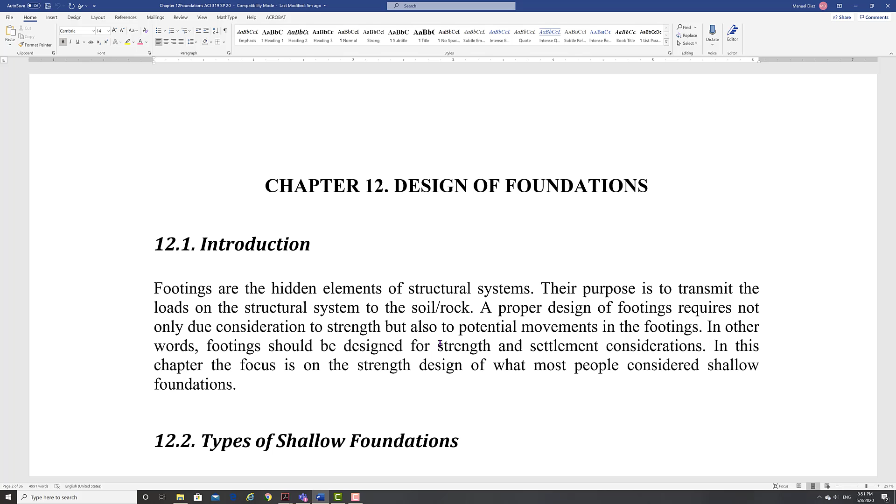In Port Aransas, they did one building, an apartment building, and that was a big lawsuit. The building started sinking, and they had to demolish the whole building just because of settlement. So, very important.

So we're going to look at shallow foundations, because there is also deep foundations, which are your drill shafts and piles and all that, but we're not going to do that. This one is going to be shallow foundations, and actually it's going to be even simplified than what I said here.

And this is really a design. In your foundations class, it's more of a geotechnical class. So what you learn there is the soil's properties, not so much the design of the foundation.

So the one we're going to concentrate on is the isolated spread footing. This one either looks like a square or a rectangular picture, and it's very typical of lots of foundations that don't need something very deep. That's the one we're going to concentrate on.

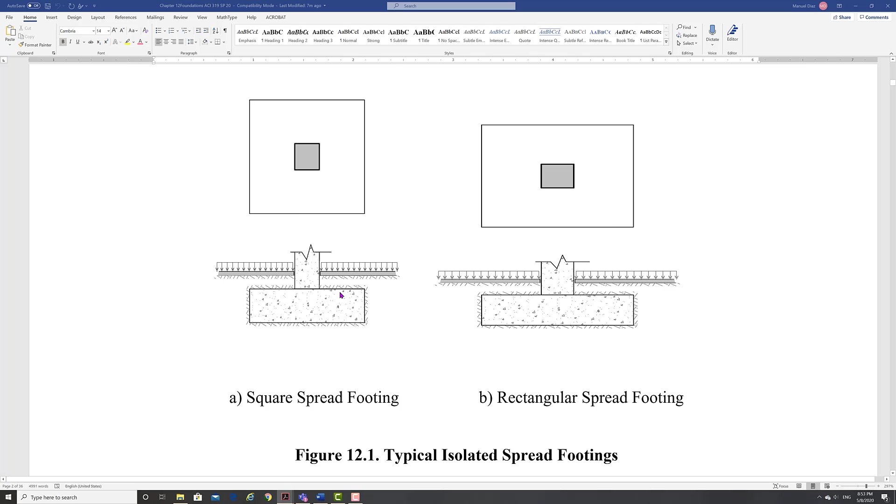So for your project, you should be doing one like this, a square footing, and hopefully you have picked a square column. I don't see any reason for you to pick a rectangular column. So let's do a square column, a square footing. That's the simplest. Then you have the strip or wall footing, which also is pretty simple.

So we might do an example of this. There is the combined footing, when you combine because the areas overlap, and so now you make it one big footing. And you have different kinds.

Sometimes what happens is you are at the property line, especially in downtown areas, things that are very crowded. So your column has to be at the edge of the property line, but that creates eccentricity. So you join it with another column to kind of balance that.

There are different types of combined footings. You can make rectangles, you can make trapezoidals. It depends - that's more about money, right? Because this one you have to form it and all that, so it costs more money.

The strap footing is similar to the combined footing. The difference is that you join the two footings with a beam. So this is actually a beam, and this means that it's going to bend - it's not going to touch the soil. But joining the two is going to avoid the eccentricity due to a column near a property line.

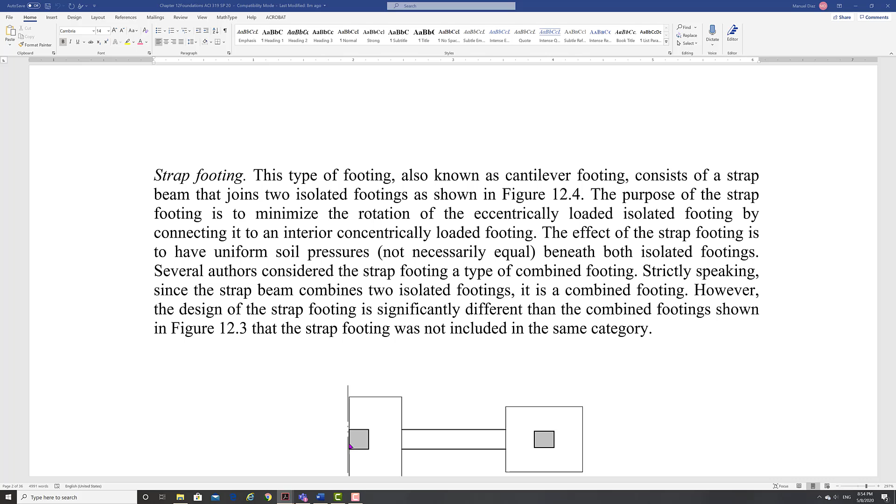The mat and raft foundation is a bigger one. This is covering lots of columns, and usually when your footings are taking about 50% of the floor plan, then definitely you want to do that. Some people go even at 33%, and you start putting these mat footings.

And there are buildings that use this. Actually our lab, for the structural lab, the new lab, that's a big mat foundation. We use it for storage tanks, heavy machinery, chimneys. Typically it's a solid slab, but it can have a combination of beams and slabs. The one in our lab is a combination - it has both, because it has a floor, some beams, some walls like beams, and then the actual footing.

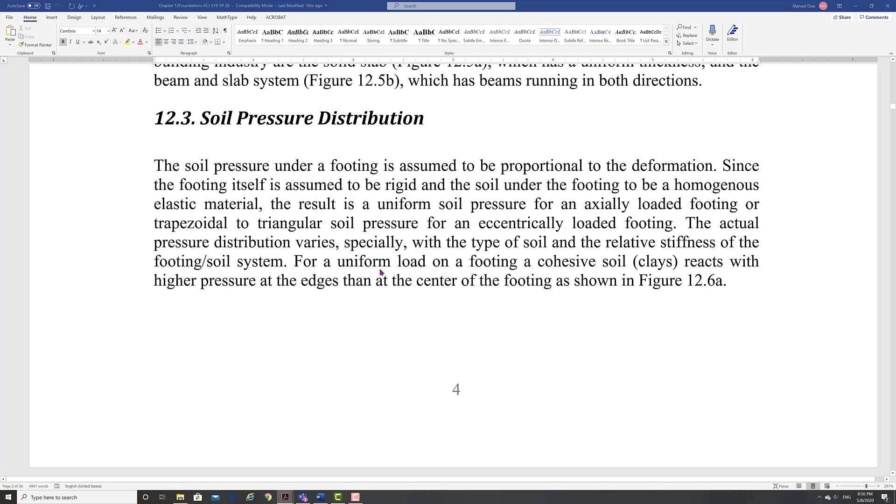All right, so how are we going to look at the soil pressure distribution? That's what we're looking at, right? And the soil is not uniform, so it creates different issues. So that's one of the problems.

Okay, we could design for this, right? But you're already thinking, no, that's too complex, right? Yes, you can do it. You can do your integration, all this calculus if you want, and find your forces and all of that. No, we don't do that.

We are going to make this an equivalent average rectangular pressure, and that's how we're going to design. How do you find the value of that average rectangular pressure? That's what you're going to learn in your foundations class after your geotech. Usually you get it from a geotechnical report. The people that specialize on that will give you those numbers.

Now, the bearing capacity of soils still gives us an allowable pressure. So now we're going back to the concept of the factor of safety.

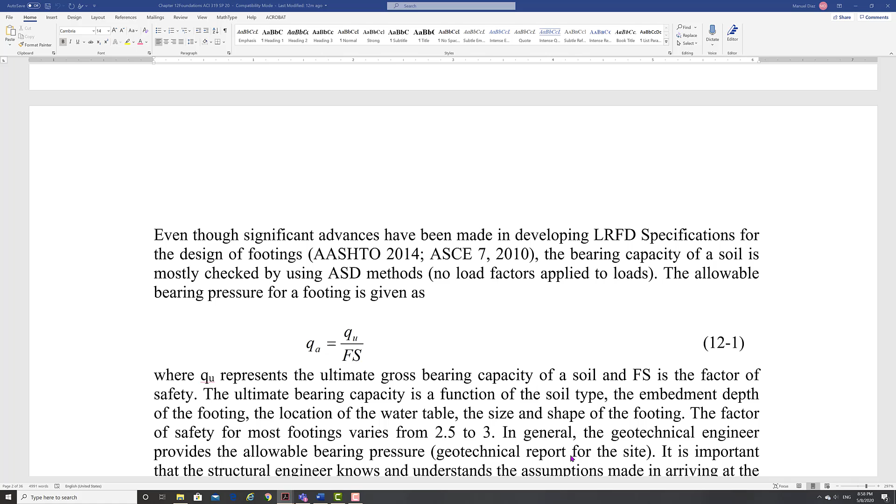The geotechnical engineer will give you the report with the site and the recommended pressures. Now if you are doing a preliminary study, you don't have any values here. Depending on the type of soils, you can pick some values for your pressures. Okay, so this is just a guess, an average of the whole thing. Don't think, oh, I got it and it has to be this. No, this is just to start.

You should have at least one test done on your site to determine the pressure on your soils. At least one test. And that will depend on the size of your structure, of course. But you need to test your soils to determine the actual pressures you can put on that soil.

So the geotechnical reports and even the codes are specified as gross areas or net areas. We need to differentiate between gross and net. A gross pressure will include all the loads that are going to be transferred to the footing, which means the weight of the soil that may be on top of your footing, the weight of the actual footing, and the applied structural loads, and any surcharge on top of that needs to be included.

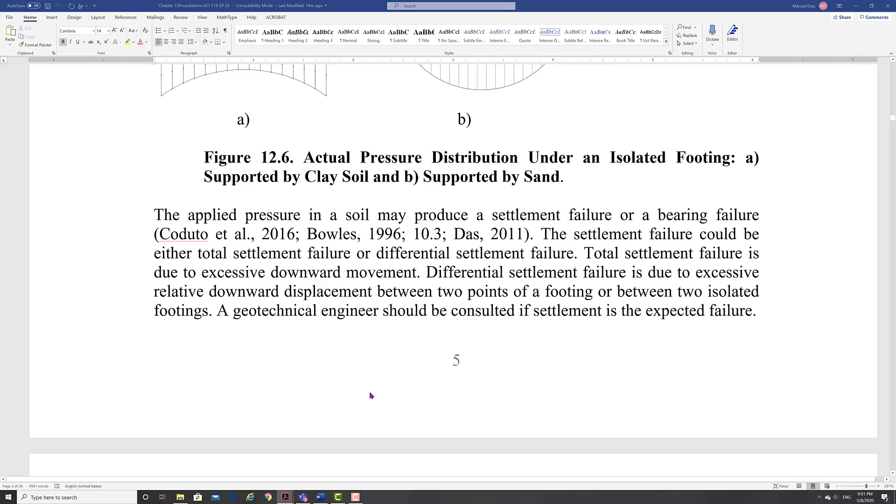So your unfactored gross total loads divided by the area of the footing has to always be less than or equal to your gross allowable value. What that means is you have your service loads coming from the column divided by the area of the footing. Now this is a problem, because we are designing our building with factored loads. Our reactions are factored loads, but for the footing, I need service loads.

So right there, we had to change our reactions into service values. We had the weight of the footing, the weight of the soil, and any other surcharges that may be applied to this structure. A surcharge, for example, would be if you had a footing here, more soil here, and on top you may have a parking area where big trucks park. That pressure from the big trucks has to come here. So that's a surcharge, a special load applied there.

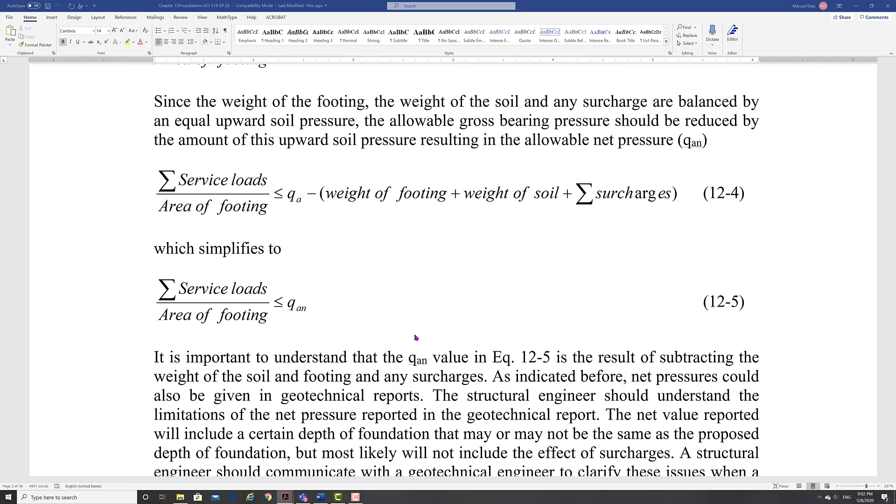The other way to do it is that you only look at your loads coming from your structural columns. But that means to this gross value, you need to subtract the weight of the footing, the weight of the soil, and any surcharges. All this becomes your net pressure. This is important because sometimes in the geotechnical report, they will give you a net value, but what values did they use to find that net value? So you may want to call and ask to make sure you understand what value you are getting.

So your Qu net is simply your factored structural loads, divided by the area of the footing. This is the value we use to design the footing. So what is this allowable qa then? The allowable is used to find the area of the footing, because you need to have some area so your pressure will be okay. So the allowable values are only used to find this area.

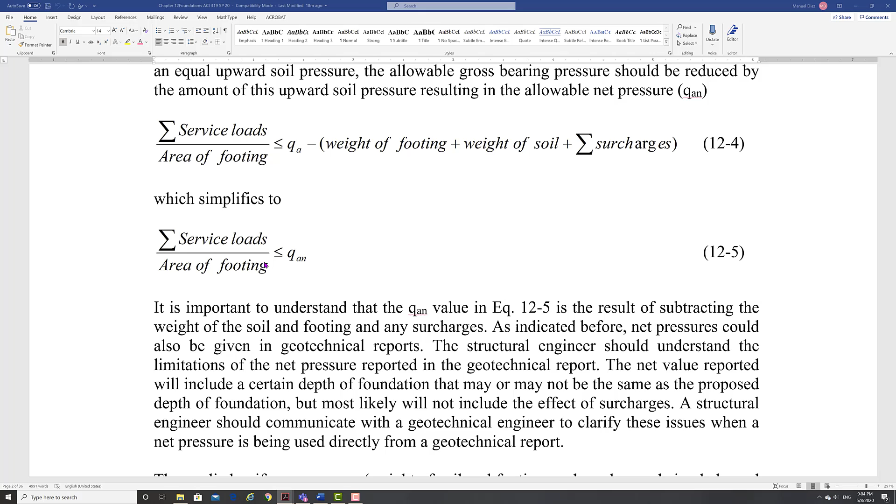Once you got this area, you had to design the footing. But the footing is a concrete footing, and concrete is designed using factored loads. So now we had to factor the loads back again, with the area that we found, and calculate an ultimate pressure, a factored net pressure. Net because we're only using the factored structural loads, so only use that one, but factored, so now it becomes a net pressure.

So we get our loads from the building reactions. Unless you run a case unfactored, you will have factored reactions. Those need to be changed to service in order to find the area of the footing, because that number will be given in your geotechnical report. You know your reactions and you solve for the area of the footing. Once you got the area that satisfies this pressure, you go back and take your factored reactions, divide by the area of the footing you found, and that becomes the ultimate pressure applied in your footing. So this is your factored pressure applied to your footing, and this is the value we use to design the footing.

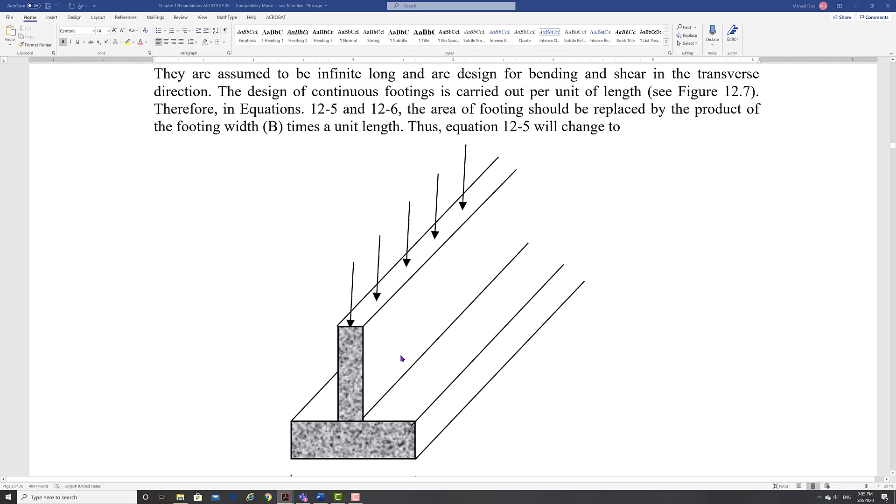Let's start with the continuous footing, which is your strip footing - it's a wall. This is the easiest one, because what you're going to do is design this portion of the footing as simply a cantilever. So that's a cantilever area, and you have rebars going at the bottom. You have to assume this - well, I cannot turn it around, but if you just imagine turning this all the way around, this becomes the top and this becomes the bottom.

It's like having a wall supporting a slab, and you're putting your loads here because that's your soil. You're applying this vertical load in your slab, but going this way, and so you are bending this as a cantilever, going that way. Your tension side is this one. So just imagine this flipped around and this portion being like a slab sitting on top of a wall - this becomes a cantilever slab. That's basically what you're doing, with the difference that the load you apply here is the pressure from your soil.

This is in units per length - we're going to do this per length of wall. That's the only difference here. We're going to have the service loads times the unit of length, because we're going to multiply by 1 foot.

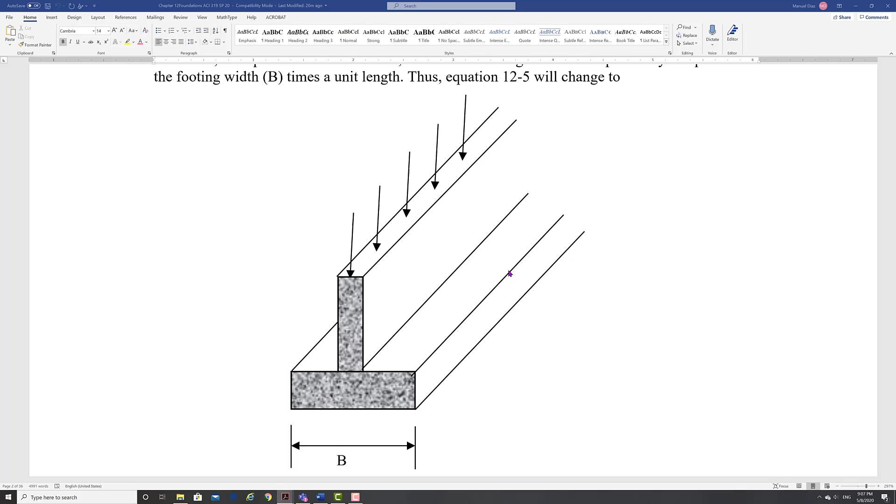So because this is a long wall, we take only 1 foot, like we did with this slab. Here we take 1 foot, we design 1 foot, and then we design per foot. Divide by B and the unit of length.

So really this cancels out. What it means is your load divided by B has to be less than or equal to your allowable net pressure. But remember, these are service loads.

Then you need to find your design load, and that will be your factored structural loads per unit length. So now you get your factored load. This is the pressure you use for design, the qu for design. This one is only to find the width you need for this footing.

So service loads define the width. Once you found your width, you go back and find your pressure.

Critical sections, this is the one we normally do. For concrete, the critical section is at the face of the connection. If you have masonry, it will be halfway between the center line and the edge, which means at B/4, if this is B, the thickness of the wall.

You have a steel beam with a plate. Again, this will be the distance from the edge of the flange to the edge of the plate, which is E. Then it will be halfway of that distance, so E/2 — that's your critical distance. So for steel and masonry, the critical distances are not at the face of the connections. Be careful, because I could ask this on the final.

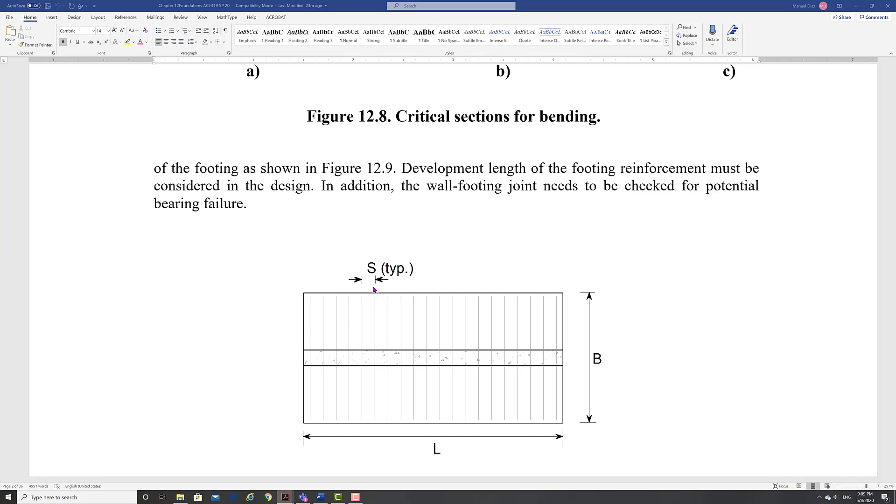Now there are of course other things that need to be done, but that's the basic concept for that. So normally you have your unit for loads.

Your live load — oh, I didn't change this, I need to change it. One of these I need to change, this one, let's see if I can change it. I don't know why I didn't change it, because it's a figure and I couldn't edit it. This is 11, not 15. I mean, I can delete it, I don't know if I even can delete it, but I would delete the whole thing. All right, so that's an 11, so that's the only difference. The 20 is okay, so we got this.

We find our load, and since I already gave you the dimensions, it was nice here. I gave you this 10, and there's a 2 already, so that became pretty easy.

Then I found my pressure from the loads, and it will be 1.2 times the 11, not 15, 11, and 1.6 times my 20. We divide by the area that would take this pressure, which is 10 feet times this length. But remember, we're going to do it per foot, so we use 1 foot. So this is my pressure per foot.

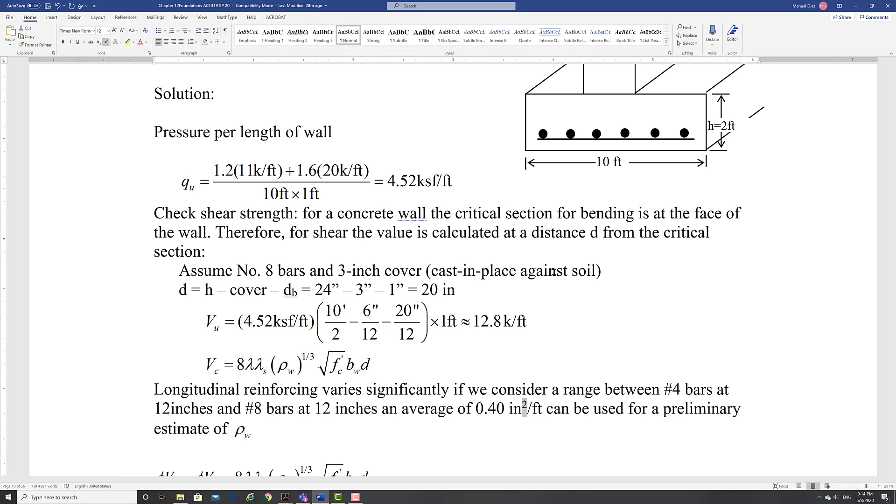You can have a range from 8 to that. So I was thinking you can use 0.40 inches squared per foot as an average, between 0.20 and 0.79. But I would say most footings are on the high end, so I will go with number 8 at 12. That's what I did, because otherwise if you use the other one it's going to be very conservative.

And this shear check is not going to pass, and you're going to be increasing your depth of the footing when you don't need that. So let's assume more on the high end — you want to be a little conservative, maybe use number 7s at 12 inches, or number 6 at 12 inches, but don't go to number 4s. Number 8 at 12 works here, so we do that one.

Is 1 foot. My D, remember, is 20 inches. So I put it in the formula — this one, as I said, can use a 1, the code allows it. There's the 1, the 0.75, my F prime C, per foot again, my D, giving me my value for phi Vc. And this is greater than the Vu, so we're good.

Notice that if I put 0.4 here, I will not make it — I will not make it. I would be changing this D significantly, which I don't need. So in footings, try to be a little bit more on the high side. The footing depth is adequate.

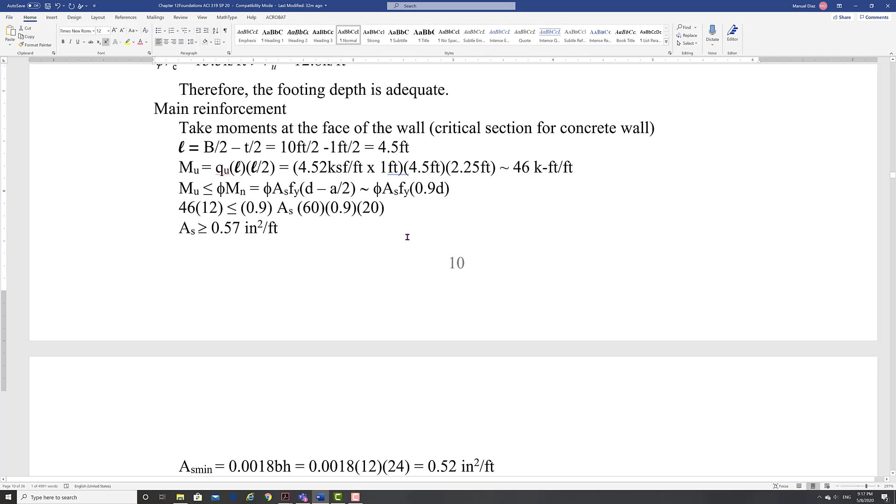Oh, I know it's not right. This one, this is 0.57... that's what is not right.

Now, in the case of footings, there is no cracking control, so you don't have to use cracking control. Don't do that, okay, there is no need for cracking control. So this will be okay, but now we're going to get more than 12.

12 times 0.60 divided by 0.57... okay, so that's 12.6. So let's say 12, right?

And so we are going to put these guys at 12. Oh, that may change our shear issues. So since we're doing 0.60 at 12, everything goes to 12. So now we've got 0.60 really at 12, right?

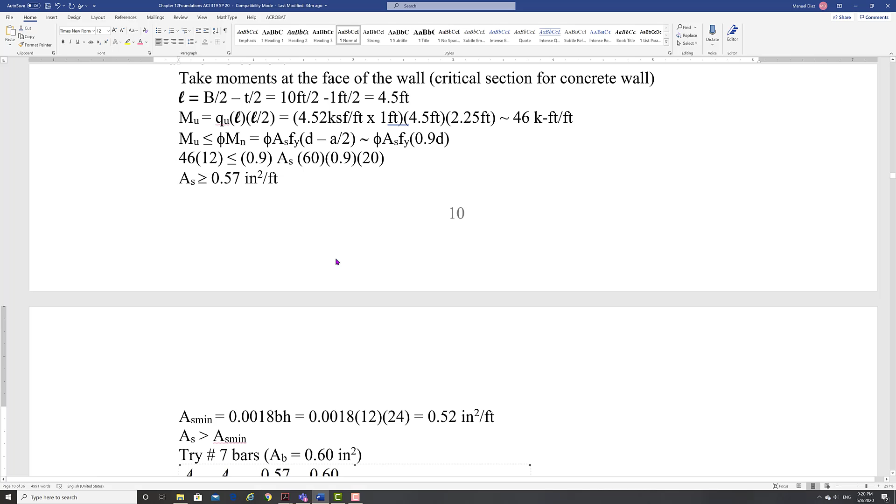Well, that's an approximate value too. All right, so we get that. Check capacity, so we got that one, so same, my D sub T will be the same. C, we can find the area here, but I'm using this one now.

Because now this one is 0.60, and that's what we didn't do. So we get 0.60 times 60 divided by 0.85 divided by 4 divided by 12, and our value is 0.88.

Okay, and so we find our C value, of course. That would be okay, 0.88. Oops.

So the number is now 104. And that would be okay, I mean this one is okay, that one would also be okay. So 104, 104.

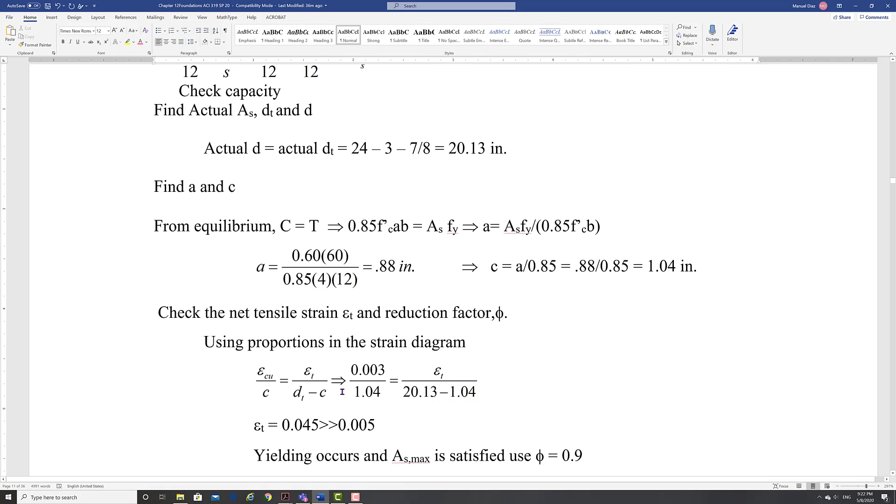All right, so AS maximum is satisfied, Phi factor is satisfied. Let's see what we're doing here now, because this one now we change it to 60 and this one to 0.88.

So let's see the capacity, is it okay? So that may be the problem there. Okay, let's see: 20.13 minus 0.88 divided by 2, equals, okay sorry, times 60 times 0.60 times 0.9, and that one is...

638 pretty much. So 638 we divide now by 12 and we got 53.2, so we're still good. Okay, 53.2. And so number 7 at 12 inches works, and we'll be okay.

Now we do maximum spacing the same as we did with slabs. So we satisfy that, so that one is also satisfied. And next we have to do the temperature and shrinkage value, so we do the same formula, 1224, that one.

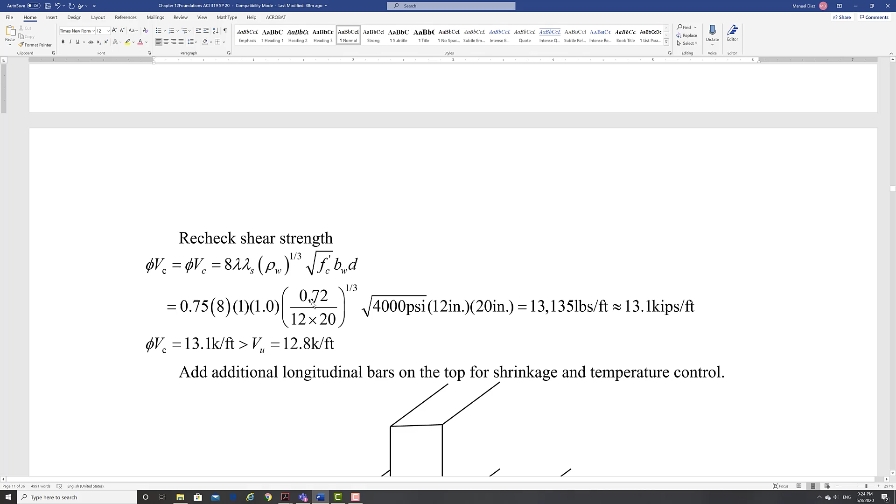And here, yep, pretty much number 7 is at 12.2. So that would be, same as before, is satisfied, is maximum. And let's recheck that here. Now I think we are going to be bad. Well, let's check it out.

The new D value is 20.13. And so let's check out that one. I think this one is going to cause problems. Yeah, now with this new formula, I mean, that shear becomes so critical that you need to recheck your assumption.

All right, so 0.60 divided by 12 divided by 20.13, and that has to be raised to the 1/3, right? Yeah, that's very low. Times 8 times 0.75 times 12 times 20.13 times the square root of 4,000.

12.4, okay, well yeah, close. 12,414, 12,414. So 12.4. So you're happy. You can say close. Close, okay, so we got it pretty close.

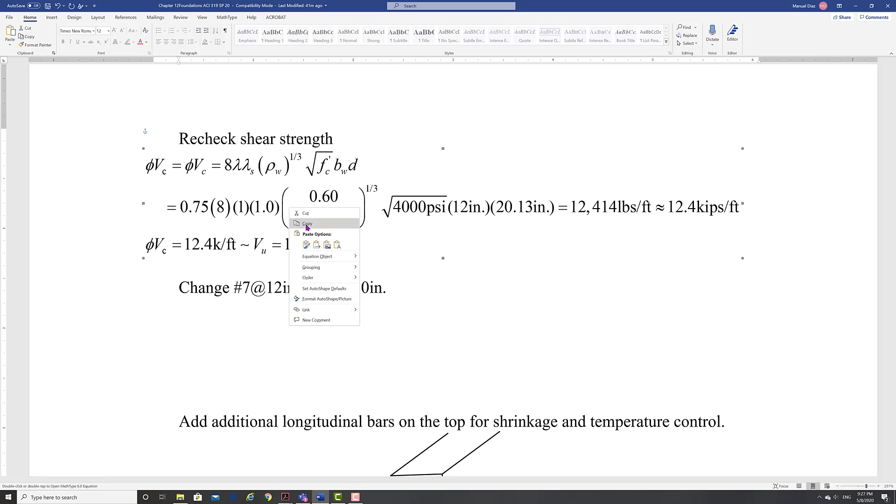And so if I do, you will have to do this equation again with number 7 at 10, which is now... copy, and let's put it here so you have it, right? Oops, that doesn't look very good. Let's see if it works here. Okay, but now we're going to put this number 7 at 10, which this one is now 0.72. Right? Number 7 is at 10.

No, you don't remember how to get that? Remember, let me finish this one and I'll show you. So we have 0.72 now divided by 12, divided by 20.13, and we're going to raise that to the 1/3.

And we multiply times 8, times 0.75, times 12, times 20.13, times the square root of 4,000. And so now we get 13,192. So let's say 13.2, and definitely now we are greater than the shear VU, right? And so that satisfies the shear.

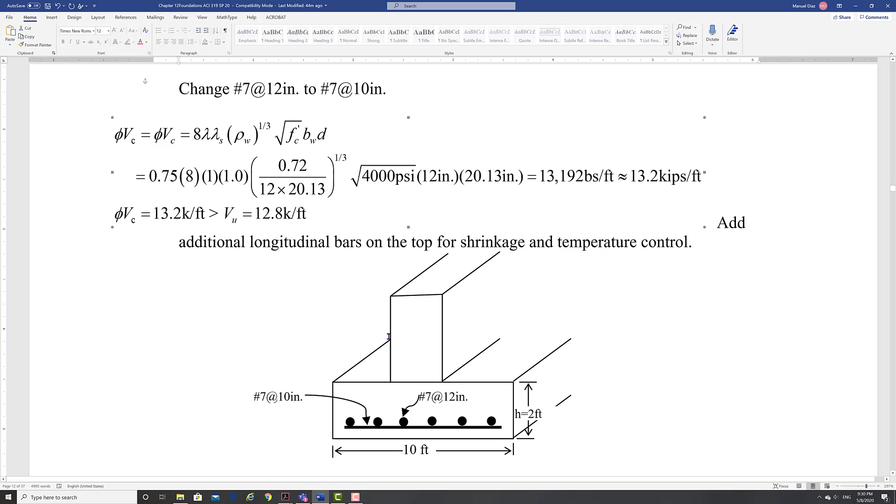And so that solves the problem, and there they are. Okay, so your shrinkage bars remain number 7 at 12, but your main bar, which is here at the bottom, is number 7 at 10. So make sure you know where to place it, because if I ask in the exam, you need to show me where. Don't put it here on the top, don't put it in the middle. Just make sure you put it in the bottom, all right?

Okay, so that then works, and some people like to put also some shrinkage bars right here on the top, like longitudinal bars, to control some cracking here on the top sometimes because of temperature shrinkage. That depends.

All right, so that is your strip footing. That's the simplest footing you're ever going to have, designing the footing for a wall. The next one, second place for being the simplest, is the isolated footing. And the problem with this one is that when you look at shear, now you have one-way action and two-way action shear.

Now you can have rectangular footings or square footings. You say for your project, square footing, please don't do rectangular. Actually, I erased the rectangular part from this one. The one that you're going to get doesn't have the rectangular, so you don't. So if you're doing rectangular, it's because you're copying from some place else. I erased it, you don't have it here.

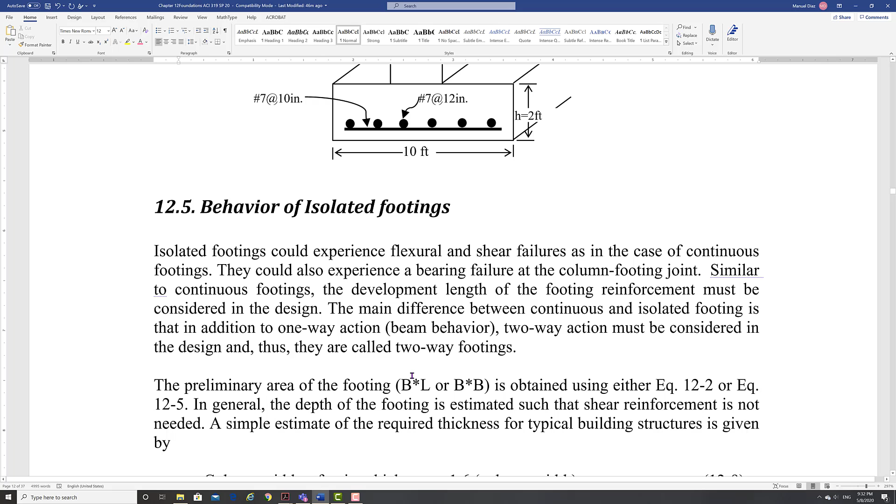Now, normally we don't put shear reinforcement, but because of that new formula in the code, now the one-way shear is more critical than the two-way shear. It's completely backwards, but it used to be the opposite. Hopefully they will change that formula, but for now that's what they have, and it's creating a lot of headaches.

So how do you estimate your footing thickness? Here's an idea, just a guess, don't hold me to this. You start with something, then you improve it, you make the changes so it works. But you have to start with something.

So either your footing will be equal to your column width or 1.6 times your column width, usually more than 12 inches. You never had that less, it's 12 inches minimum usually, most of the time. So if you have an 18-inch column, you're looking at 18 inches or 24 inches, something like that, approximately. That's just to start.

There are other formulas in your geotechnical books for foundations, you can find those and use them. And 12-10, no, that's another reference, there's another book, that's Coduto's. Coduto also has a good foundation book. Bowles here is an old book, but it's very comprehensive in terms of foundation. Even at the time it was published, he was already using some software, not as sophisticated as what we have now, but at least some software in there. Very comprehensive, this one right here.

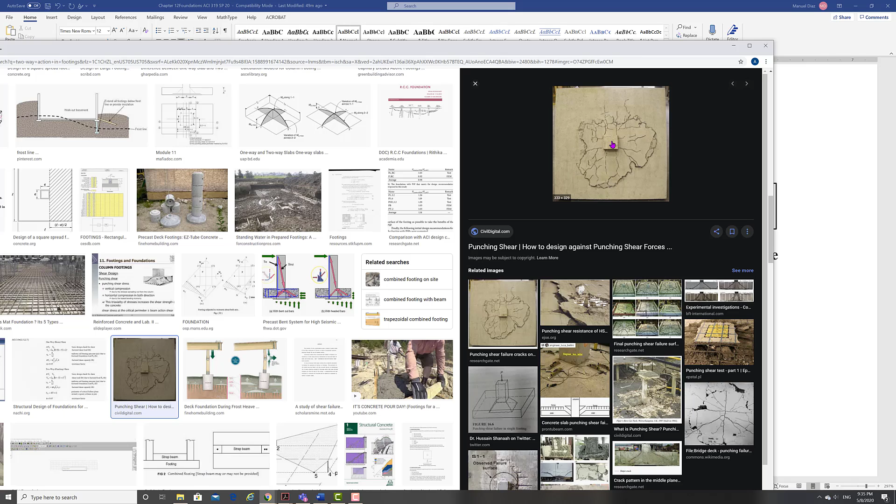So here you can see the column, right? This goes through, okay? And that's why you get a double, so shear in all directions - shear problem here, shear problem here. So that's the model. We're assuming the column is taking a piece of concrete and pushing it down in this case.

This concept was developed mainly for slabs, but then it's being transferred to footings. So really what's happening is something like this: in a slab, the slab will fail because the column will just punch through. But we're applying it backwards, so we're seeing the slab as our footing, and now the column is going to punch through there. So there is that possibility. Of course, there is the soil, so it's less of a hazard, because with a slab going into air there's nothing else, so the slab fails. But in the case of the footing, it's punching through into the soil, so it's not as bad, but there's still a punching shear effect.

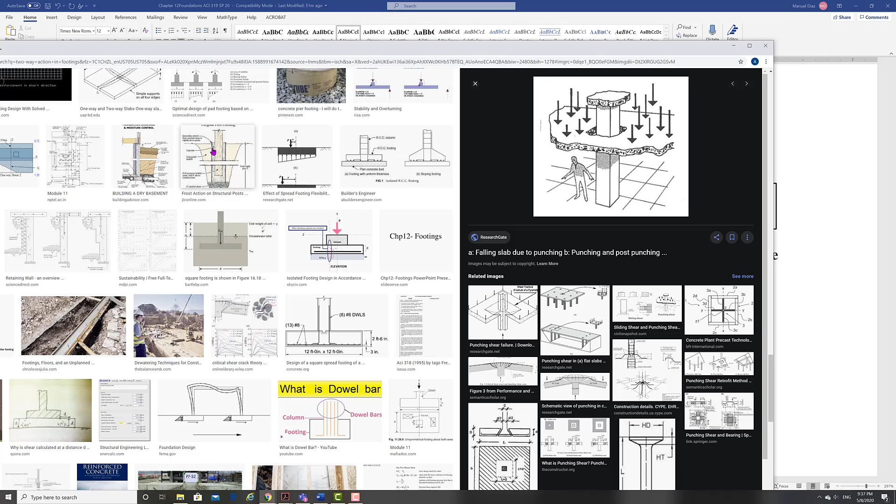Let me see, there's another one. It's difficult to see these failures because normally when they happen, they're buried, and you need to excavate to find them. I don't see any real failures shown here, but that's the whole idea.

The column could punch through that footing, and therefore we need to protect it. And that happens not at the distance d - we consider this the critical point, but now it will not be d anymore. This will be d over 2 now. So that's what we call a punching shear failure, with the critical distance at d over 2.

And the other thing you had to look at - let's go back and look at this again. This happens along this perimeter. So the area that is carrying the shear, by equilibrium - this force is coming down, you need to have shear forces here on these faces, going the opposite way to balance this.

When this force is greater than the shear forces along the faces, then you get a failure, and the shear goes along all this area. So the perimeter multiplied by the d value gives you the area. Your total shear area is the perimeter multiplied by d. The perimeter is what we call B naught, and d, of course, is what you already know. The perimeter is this length right here, because the shear on each of these faces has to add up to the forces in order to maintain equilibrium. So that's the B naught we talk about, that perimeter.

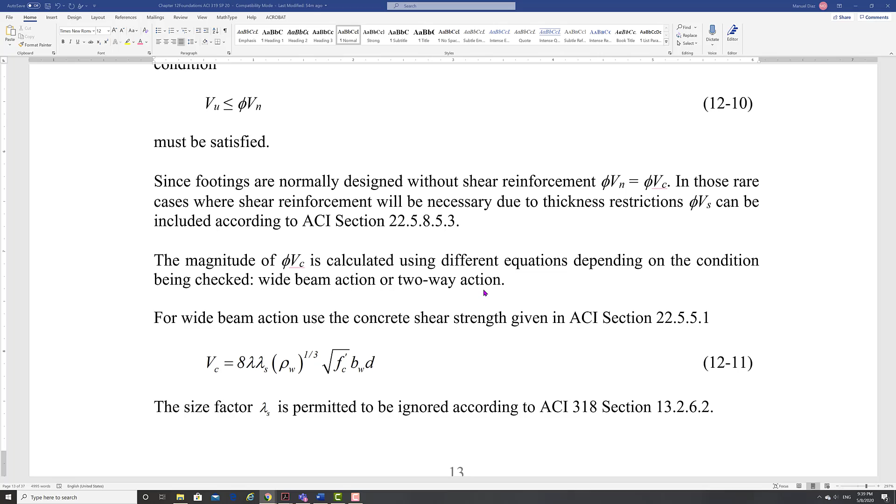So again, you need to satisfy this - no changes there. Normally we use the concrete only because we don't have stirrups, but you could put stirrups, and then you'd follow the same design as shear with stirrups. So you may have either wide beam action, which is your one-way shear, or the one we just described, the two-way action, which is your punching shear failure.

So we have two types of shear behaviors: the wide beam action, which is your one-way shear, the one we learned, and now the punching shear, which is the two-way action. For the wide beam action, we use this formula, and as I said, lambda S, as we did for the wall, comes from code section 13.2.6.2.

Let's double check that - I think I closed my code. No, let's see, code right here. Okay, here is the code. Section 13 is foundations, and there are lots of little details for foundations here. 13.2.6.2 right here. Okay, what is this thing?

Okay, there it is. Barely here. Okay.

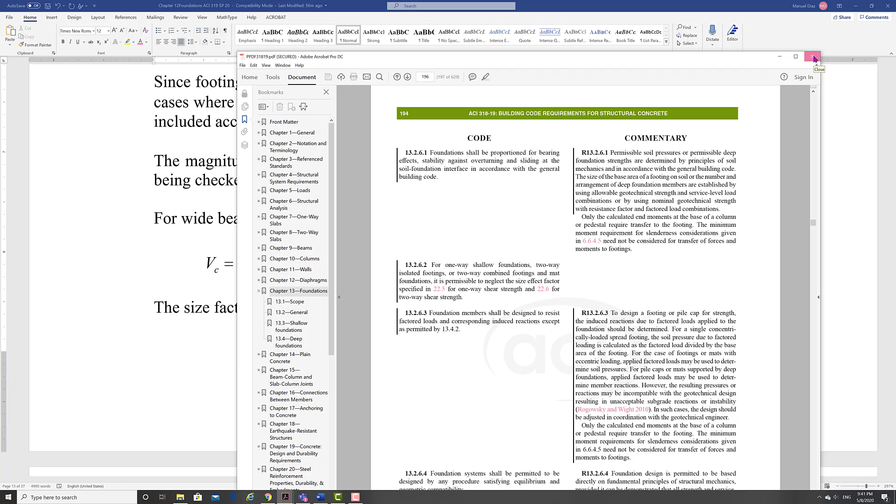So for one-way shallow foundations, two-way isolated footings, two-way combined footings, and mat foundations, it is permissible to neglect the size effect factor. So we can do that for one-way shear and for two-way shear, we can neglect it. We're going to take advantage of that because if you don't use it, you will have lots of problems with shear.

So that means this value, lambda s, is going to be 1. The two-way action has different formulas, not just one - three formulas, and we're going to pick the lowest, usually this one. It has the lambda s too, but again we can ignore it.

The other problem is that the new code 318-19 is giving you this in terms of stresses. This is not your capital VC - this is not a force, this is a stress. So be careful, this is now in terms of stresses. That's how the formula is intended.

So what is beta? Beta is simply the ratio of the long side to the short side of a column in this case. It can also be the long side or short side of a footing or a wall. So beta is always long side over short side of a member.

Alpha S is a special coefficient that depends on where your column sits. For most footings, your column is right in the center of the footing, but there could be special cases where it's not. And B naught, I already explained - that's the critical perimeter. So that's very important.

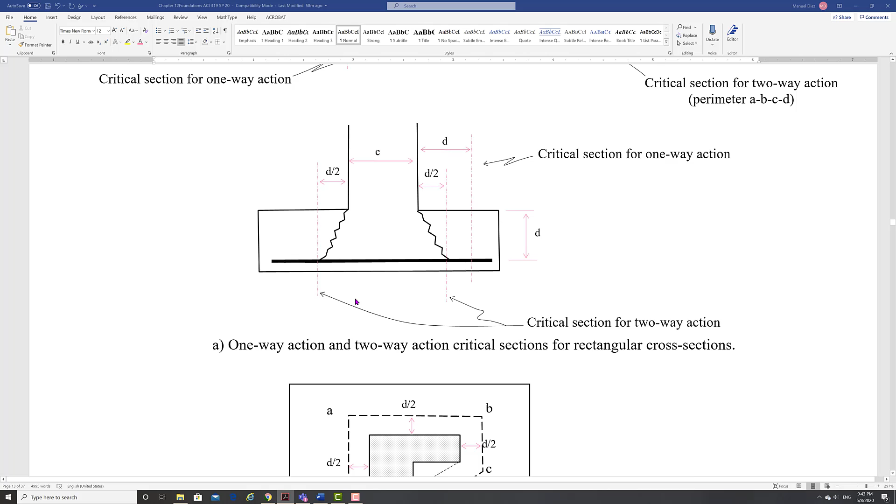So you have this column - for one-way shear you do D in this direction, but you also have to check the shear in this direction. Don't do a rectangular column because you have to design twice - it's double work because you have to design your one-way shear this way, your one-way shear that way, and on top of that your two-way shear.

So don't do rectangular sections. Now this is the generic case - we measure d over 2, d over 2, d over 2, d over 2. Those lines perpendicular to those d over 2s define the perimeter B naught. So for one-way shear we use D, and for two-way shear we use d over 2. Different critical sections.

So you have some weird shape like this - the code allows you to do that. You join an imaginary line here, measure d over 2, and then you get that perimeter. Always perpendicular here. In reality here should also be d over 2, so you'd round it, but no, we don't do that - just keep it straight.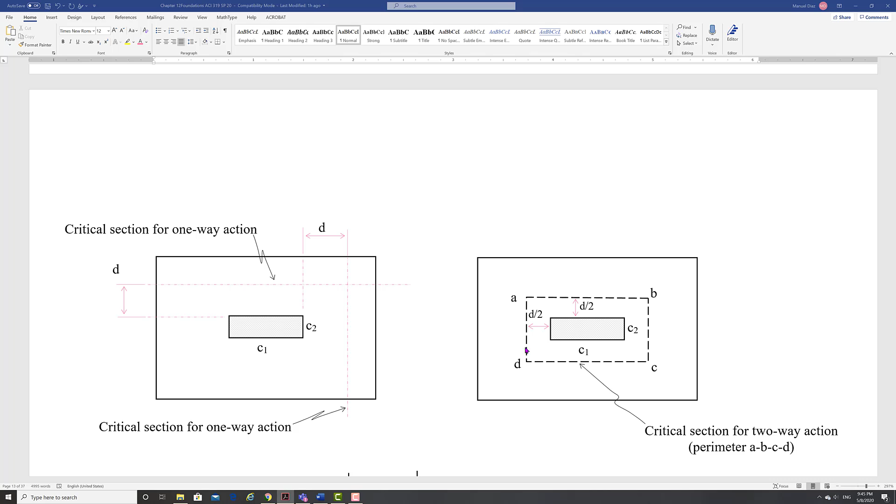So at the end, if you have a rectangular section, this distance is going to be the column dimension C2 plus D over 2 plus D over 2, so it's C2 plus D. Going in this direction, C1 plus D over 2 plus D over 2, that's C1 plus D. You have 1 and 2 and 1 and 2, so your perimeter B naught becomes 2 times C1 plus D, plus 2 times C2 plus D.

Now if you have a square column, C1 and C2 are the same, and everything changes to this. Now if you have a circular one, you can use this formula.

So either this one or that one, okay? But don't do rectangular, okay?

All right, here is the alpha. Alpha S 40, column right in the middle. You can have this one.

This one right here is a corner one, very rare. Because in these cases, normally what you do is join this with another column and make a combined footing. Same with this one, I can join it with another one to make a combined footing to avoid that eccentricity. So the one we're going to see is this one, okay? The most common one.

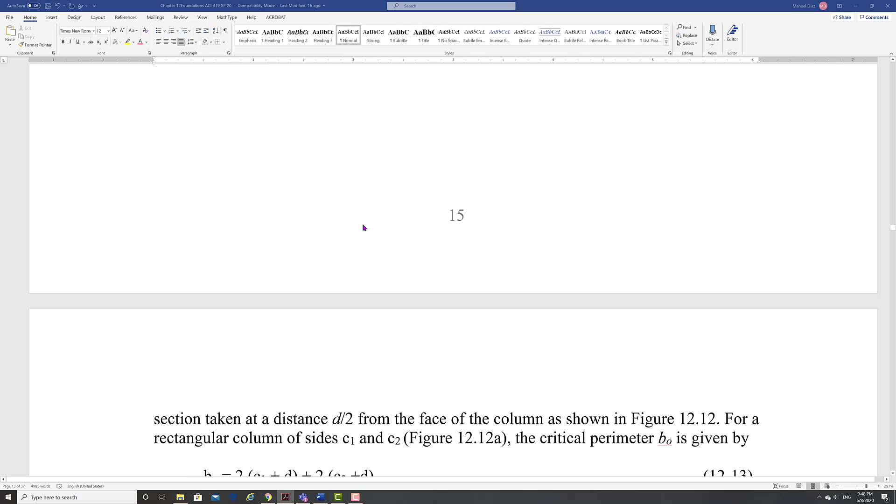So you look at these formulas, notice that in order for this one to be smaller than the 4 that you got here, this one has to be greater than 2. So you have to have a rectangular section that is more than a 2-to-1 ratio. Then this one controls. Otherwise, this is going to be bigger than 4.

The same here, but it's a little difficult because it's this D over B naught again. So the shear strength is inversely proportional to the B naught D ratio. Don't forget that for those quick questions in the final. Shear strength capacity decreases as the ratio B naught to D increases, so they're inversely proportional.

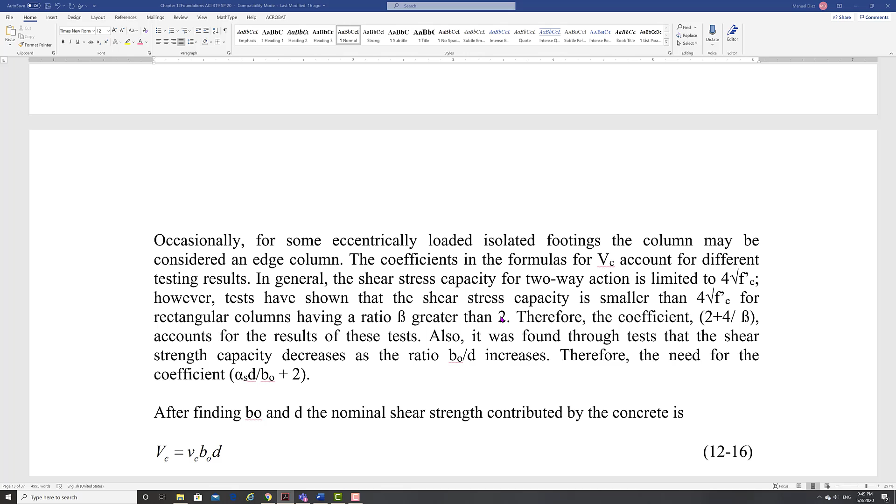And also as you increase your rectangular columns to a ratio greater than 2-to-1, your shear strength also decreases. So after you find your B naught - I showed you already how to find it - then how do you change your lowercase v sub c into a VC that we normally use? We multiply by B naught D, and that makes it the V sub c that we normally use.

Flexural strength, this we already done. We need to have reinforcement in both directions. So it's like designing bending in one direction, then you have to design bending in the other direction. If your footing is rectangular, there are special requirements on how to distribute the bars. That's what I said, don't do rectangular footings, because there's special requirements I'm not going to show you here.

What is the minimum? The minimum is same as slabs, so we got that one. And here is a regular square footing. Notice that you design in one direction, you already got the other direction.

It's the same. But if you do a rectangular footing, notice that the rebars going in this direction is not the same as the rebars going in this direction. They are different spacings, and so it's more work. So don't do rectangular footings, for now. When you learn them, you can do it, but not now. Spacing is the same as slabs, 3h or 18 inches.

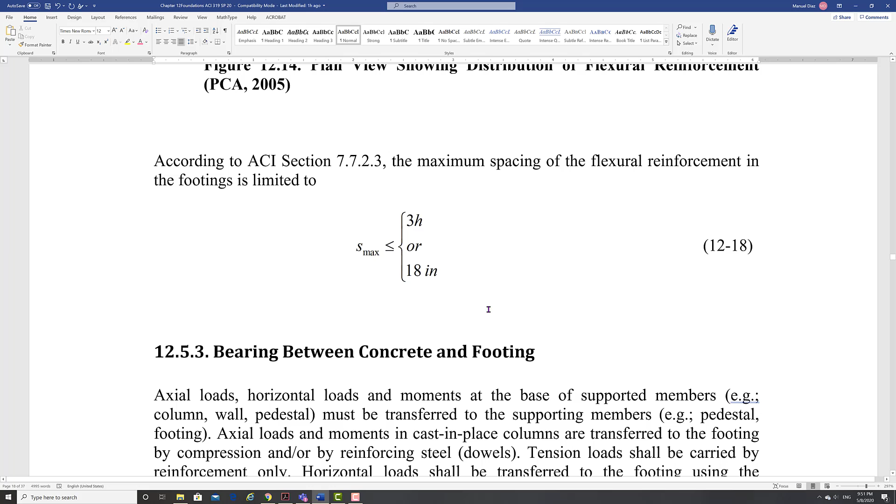Other thing you have to worry about is because you're putting a column into this footing, at the base of the column you need to make sure the column does not crush. So we need to look at the bearing capacity of the column. There is a bearing formula - this is the bearing capacity of a column, and it's given in your ACI, section 22.8.3.2.

Now I don't have my code. Oh. Yeah, so that would be a special chapter that we haven't seen yet. Let's make sure we got it right. So, what happened to my code? Okay, code.

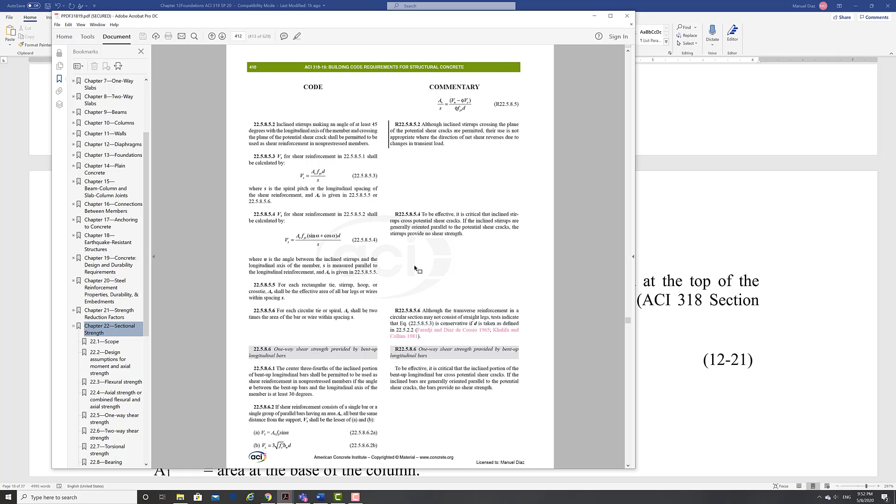Okay, here's the code. All right, 22, so we're looking at 22.8.3.2. Remember, anything about designing formulas are here, at least the ones the code is giving you.

Okay, 22.8.3.2, so here are the formulas. There is the one I'm giving you, this one. So this is the first one right here. And then you have this one right here, which is the supporting surface - that will be your footing. So the footing has to go through this.

So it has two values that we need to check, and we're going to do that. This is the one with the column, based on the area of the column - so this is the area of the column.

And then the footing has two formulas. This area 2 is not exactly the area of the footing, but is the area of a truncated pyramid, or cone if you're doing circular, with slopes of 2 horizontal, 1 vertical. This is very important because a lot of people use the area of the footing, and sometimes that's not right. However, in most cases, this one controls - it's very hard not to have this one controlling.

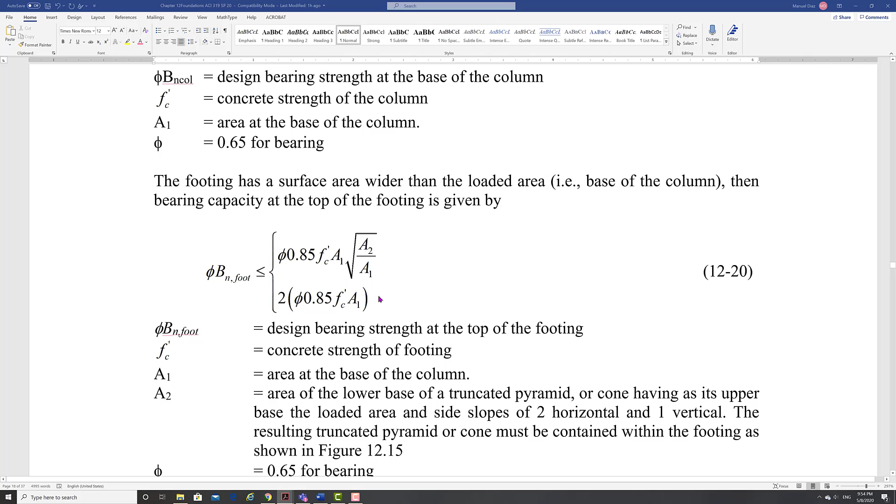You can change this by saying, I'm going to use this symbol here, kind of weird, right? And that symbol represents whichever of these two is the smallest, and put it there, and that becomes the same formula. But that's not important here.

So what is this truncated pyramid? Let's see, we have some right here. Okay, there it is, 45 degrees, nice, right? So we're going 45 degrees, but we need to go 2 horizontal, 1 vertical.

And the moment you hit the wall, that's the maximum you can use. So in this case, you can use the full area of your footing, because this one is getting to here, and this one will get to the same point. So that means your truncated area matches the footing.

This one, though, is different. You go 2 to 1, and this one hits the wall first. This one doesn't, but you cannot take it down. So it has to stop at the same level. So now your area is smaller than the area of the footing. So whatever is the shortest value that hits the edge, that's the one you have to use.

So here's another one, for example. This is a rectangular footing. If you go in this direction, you're going to hit the wall faster than in this direction, at this point, which is H1. So that means when you go in the other direction, you have to stop at H1. And that becomes your area now. That's what I said: whatever you hit first, that controls your area.

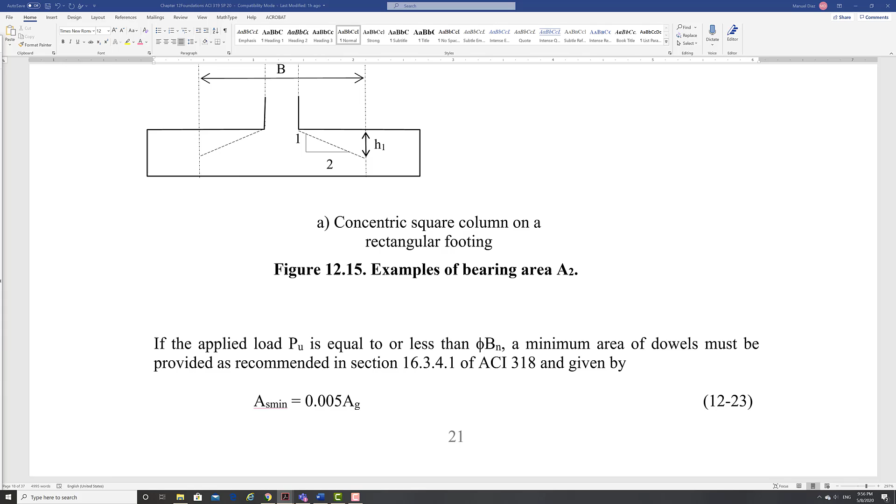The minimum area of bars that you need to pass through the column into the footing is given by this formula, given in ACI section 16341. This is kind of messy now, right, going to 13, 22, 25, 16. We're going to different chapters now. But chapter 16 is the connection chapter, that's why. Connections, right?

So 16341, let's see. Okay, right here, this is what you need to satisfy. At the interface, that's where you're crossing between a column or a pedestal, a column or a footing, a pedestal or a footing, any transition like that, you have this minimum amount that you need to do.

You do not satisfy that if PU is greater than your bearing. Then this is why you find the area required: what is the actual number of bars that need to go through. PU minus your bearing, divided by the strength of the bars. It has to be greater than this minimum, because this represents the minimum you can put. If this value is less, then you use the minimum.

And those bars are what we call the dowels. These are the dowels. For some of you that have made the visit to the construction site and have seen some columns, those are the bars that kind of stick out sometimes, from the footing up. Those are the ones.

Now, in the case of the dowels, you can have larger sizes than the column bars. You can do that, but usually no more than one size larger, this kind of practice. Now, if you have number 14s or number 18s in compression, your dowels cannot be more than 11 bar. So that's an exception there: 11 to 14, 11 to 18.

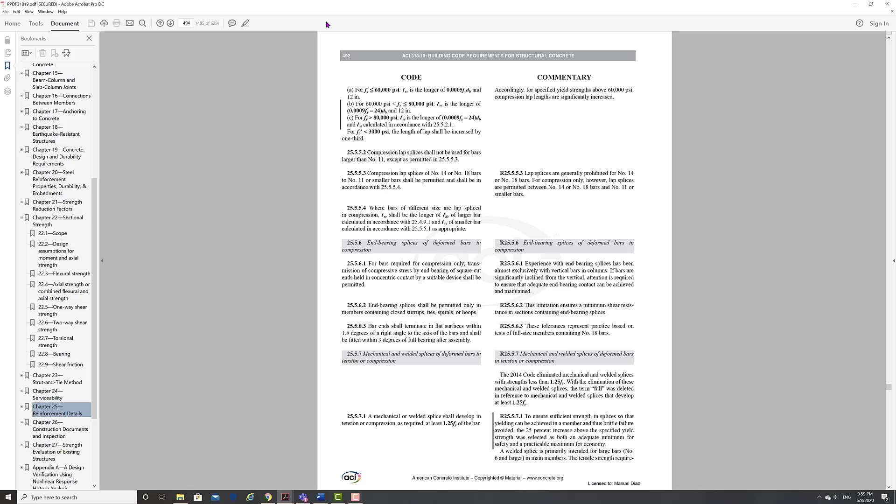ACI 25.5.5.3 tells you that number 14 and 18 bars lapped to number 11 or smaller shall be permitted. So that's the exception to that. Otherwise, no more than one size larger to do your dowels.

The dowels, of course, will extend right into the footing. And two problems: you need to define the splice length, and you need to define your anchorage length. So development lengths are required to be checked, and splice lengths are required to be checked. Here we're going to use what we learned in the previous chapter.

So here's the example. I changed the loads but couldn't change the figure, because this figure was done a while back, and it was copied from a MathCAD solution, so sometimes you have some weird numbers. I noticed that but couldn't change this. But the values are 345 and 178 now, coming down into this. So this one has been changed.

You got the column width, 20 inches there, right? And then you got 2 feet here, 6 inches of slab. That adds the weight that we need to consider.

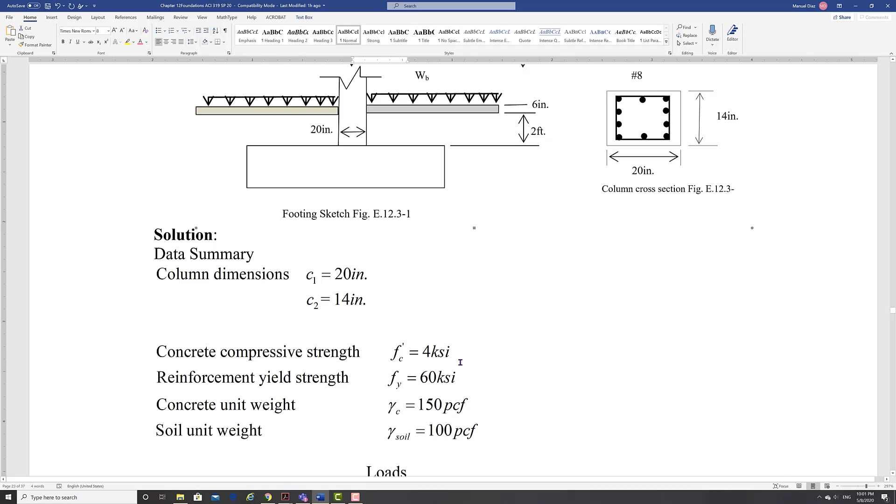So we got the dimensions. Here is that weird rectangular section that you don't want to do, really. You want to make it square because it's a lot easier. In there, you have a 6-inch floor slab.

This is what I gave you in your project. This is the one where you're getting confused and you were trying to use it for your floors. No, this is your slab that is in your first floor, okay?

There are the pressures that I gave you too, for your project. In this case, I'm saying that the top of the footing is going to be 2.5 feet below the floor slab. You can make the same assumption if you want in your project.

Now here, though, you're going to put the loads that you found for the first floor. Remember you had these first floor loads that we were not using? Now they become important because you had to transfer that here. It will be subtracting from your gross value to make a net value, and so that's what we have.

Then I also gave you the unit weight of the soil because you need to add this weight. Now you can add all this. Normally we ignore this column and we say all this is weight of soil.

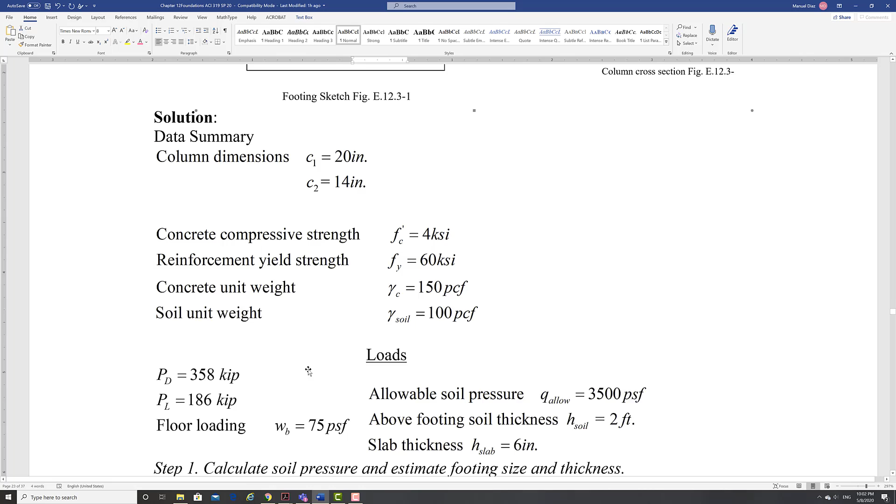So column dimensions, compressive strength - see all this set up like MathCAD. Again, these loads have been changed, and this one I should be able to change, I think. Let me see: 345, 178. Yeah, so I can change this one.

All right, so these are the real loads we're using. The allowable is 3,500. Soil on top 2 feet, slab thickness 6 inches, floor loading 75 PSF.

Soil pressure - so we're going to find that. First, we need to check the height, right? We need the height for the footing, even though I think here it shows that already, or no? No, I didn't show it.

Okay, so we do this magic formula, remember I showed you? 20, 32... oh, I just pick a number, 28. This is a guess. Remember, it needs to be checked for your shear, it needs to be checked for your moment, all that. If it doesn't work, you change it, but you are close. Now you know what to do.

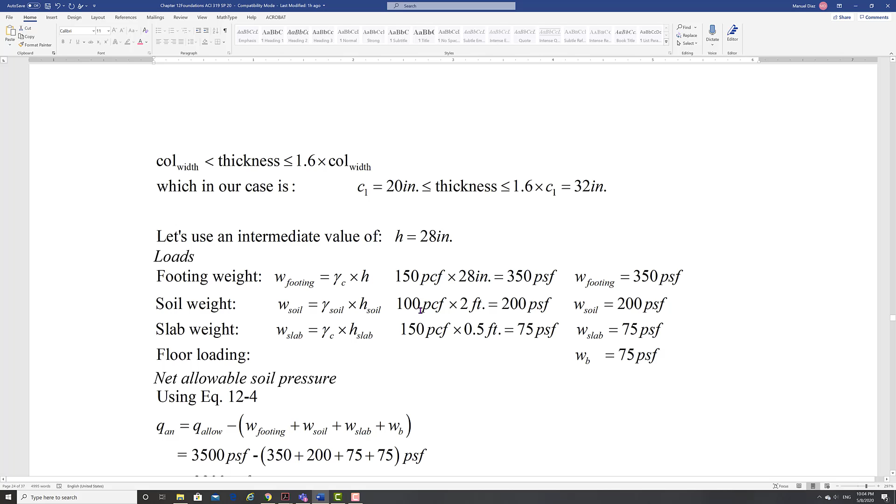So I'm going to find the footing weight, the weight of the footing, gamma of the concrete, because of the footing - the height is 28. That gives me this much pressure from the footing. The weight of the soil, 2 feet of soil, gamma of the soil, 200. Again, as I said, we are ignoring the width of the column, so we're saying all this is soil.

Next, we're going to the slab weight, 150 times 0.5, 6 inches, that gives me the weight of the slab. Again, we are assuming that slab goes all the way through, so that's little things in there.

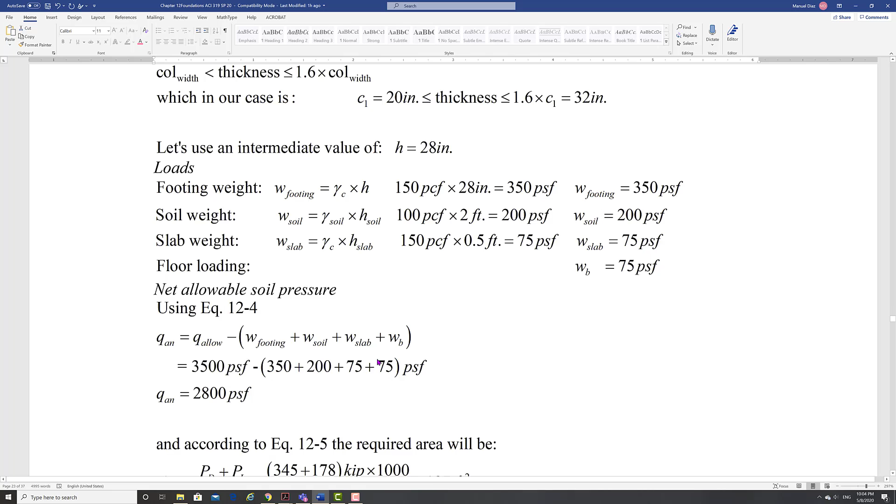So we got those weights. Floor loading that was given, so we got 75. Yeah, in your case, I think you have what, some other pressure - you have like 100, right? Yeah, for your project, so you got that.

So the net allowable, then it will be my allowable that was given minus all these uniform loads. So I'm going to take all those out, and then it becomes a net value of 2,800. This net value has to carry my loads from the column, so my loads for the columns are these. So I divide by my net, that gives me my area that I need for the footing. Since I'm going to make this a square footing, I get about 14 feet. So I'm going to have a 14 feet by 14 feet square footing to carry my load.

Of course, loading 1.4 doesn't control, so it has not been considered. So here it is with the pressure. You can turn this around and look at it like a slab on top of a column, and this is your reaction—you can look at it that way.

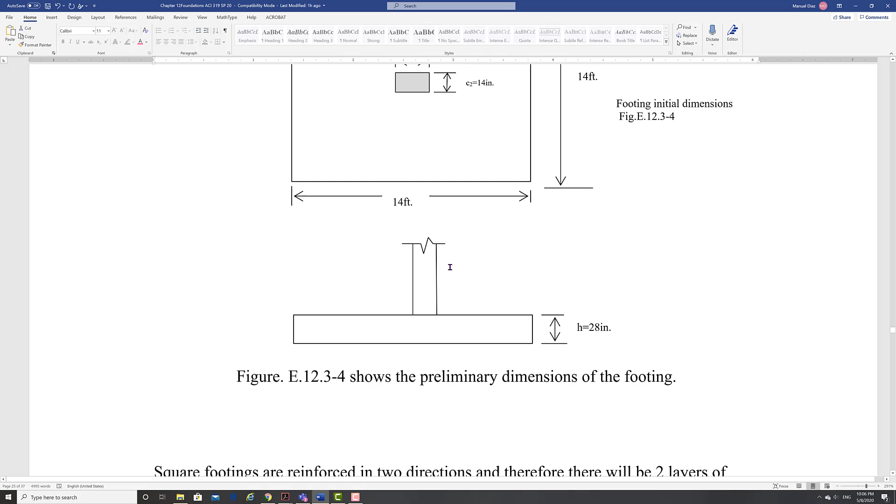So we're going to design for this, and because it's a square, the worst length dimension is going to be this one, because this is 14, which gives the longest value and therefore the longest bending. On this direction it's a little shorter because this is 20. So I'm going to design this way, then use the same on the other direction, but they're close, right? This is what I guess, 28, right?

So now we start checking—we find a D value, an approximate value. We're going to assume number 8 bars. Typical cover is 3 inches. Usually you have double layers because you're putting bars in this direction and bars in this direction, so you have double layers. Our D then is a D average—it's H minus the cover minus the diameter of 1 bar, not half the bar but 1 full bar, because we're averaging between the 2 layers. That gives me 24.

This is step 2, and it was always step 2 because two-way shear used to be the most critical thing for these footings. But now, with the change in the new formula for one-way shear, two-way shear is going smooth, no problems. So, what is the two-way shear?

We need to find the perimeter, but at a distance d over 2. So how do we find that perimeter? Well, we take that one, and remember your C dimension plus d over 2 plus d over 2 on both sides—that gives you c plus d. Then the other dimension is the other dimension of the column plus d over 2 plus d over 2, giving you c plus d again. You multiply those two dimensions, and that gives you an area—that's the area of the perimeter.

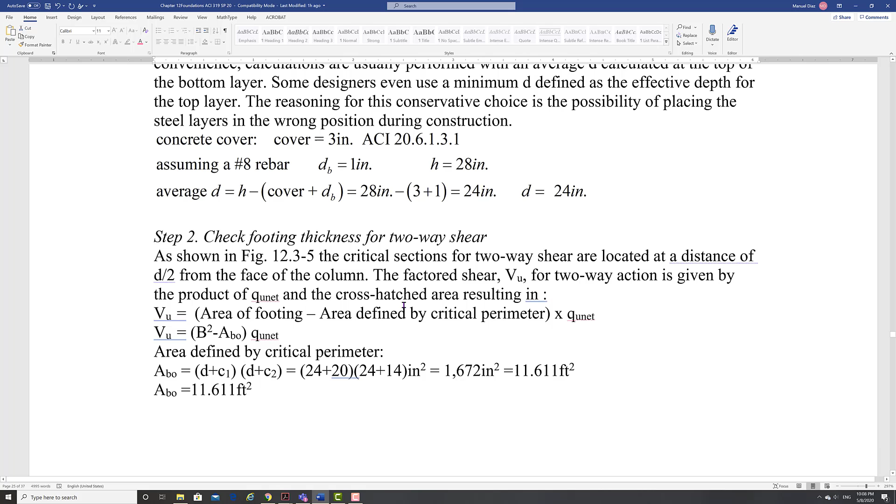So what I'm doing here, let me see if you can do this. All right, so there it is. So here is your footing, and I'm subtracting this area, which is the critical perimeter at the distance d over 2. So what I'm saying is the load applied on this shaded area is the shear that needs to be transferred along these faces.

Remember, this breaks—this is the area that is going to fall, the shaded area. That load has to be transferred through these faces. That's why my shaded area is B squared minus the area of that perimeter—B squared, which is this area, minus the area of the critical perimeter, gives me the shaded area.

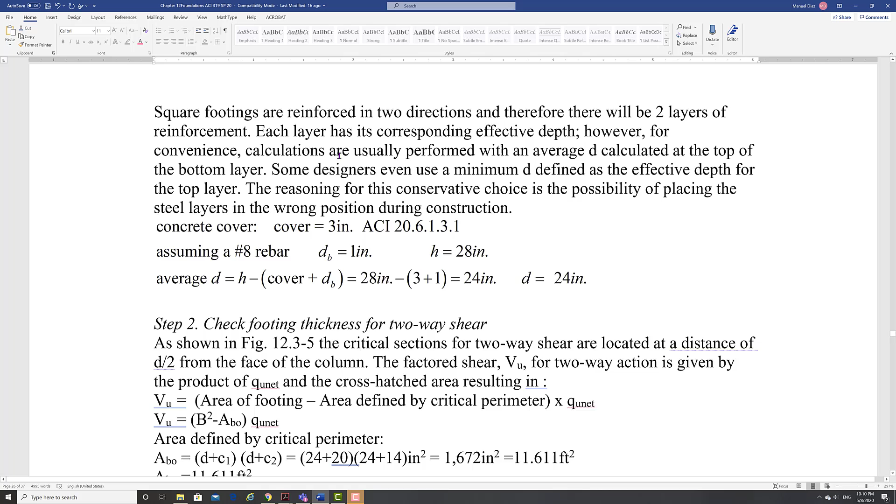So the shaded area then is this value—this is my perimeter area, and I can find my shaded area by doing the subtraction, multiplied by the pressure from the soil that we found earlier after factoring. That was the load being applied to my footing. So load times area gives me the total force applied on the shaded area, and that becomes my shear force that has to go through all these faces.

So that gives me that number. Then I'm going to find my perimeter, right? So my perimeter, again, you are going to add this plus that plus that plus that. So you're adding, that gives me my perimeter.

I'm going to find my beta, so you got rectangular column. I don't know why you do rectangular column, it's just more work. So you have a beta now of 1.42. Should have been, you could have done a 1, right? But there it is. Center column, so that's a 40.

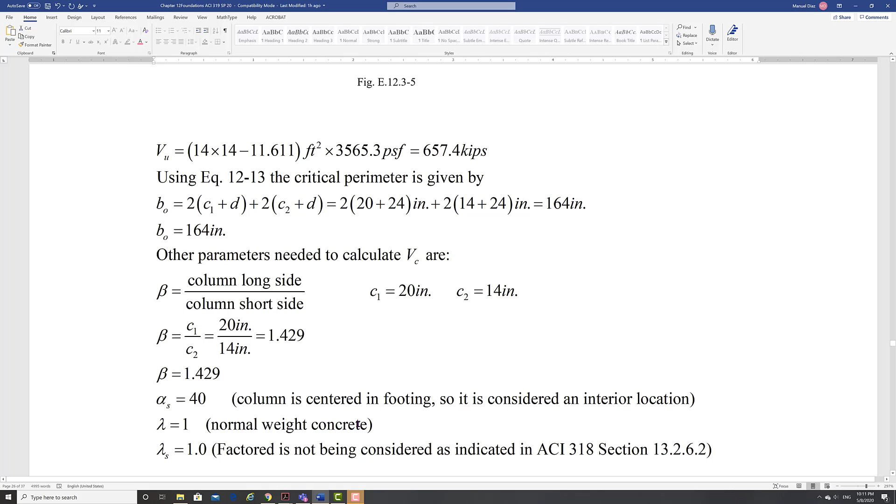My lambda, normal weight concrete. Remember, this can be ignored. Good thing, I mean, gosh, that would have been killer. Okay, so we can ignore that one. 13.2.6.2, right? And we find our values.

I multiply by B naught D, so now the stresses became forces, V sub C, okay? So there are my three values. I pick the lowest, as I say, usually that one governs, and that's what it is.

So you are rushing in your exam, right? You don't have time to check these other two formulas. You can say, I'm assuming that this is going to control, but that's the normal case, and I'm going to continue with that value. And then you say a couple of calculations here.

But these need to be checked. Especially, remember, this one is easy to discard, because you have a square column, this is gone. That would be a 6, more than 4 already. This one a little bit more difficult, but you have a center one, normally it's going to be also high. Okay, so 90% chances that's going to be high. So that means this one controls.

All right, good. So I got this value multiplied by my phi factor of shear, 0.75, bigger than my VU. Great, pass two-way shear. My height is good. Now I have to do one-way shear.

One-way shear. Remember, we're going to go into the longest length that we got because this is rectangular. If it was a square, it doesn't matter which direction you do it. So I need to find my critical distance for one-way shear. That one we know is a D value, right? It's from the face, a distance D. That's my critical section for shear.

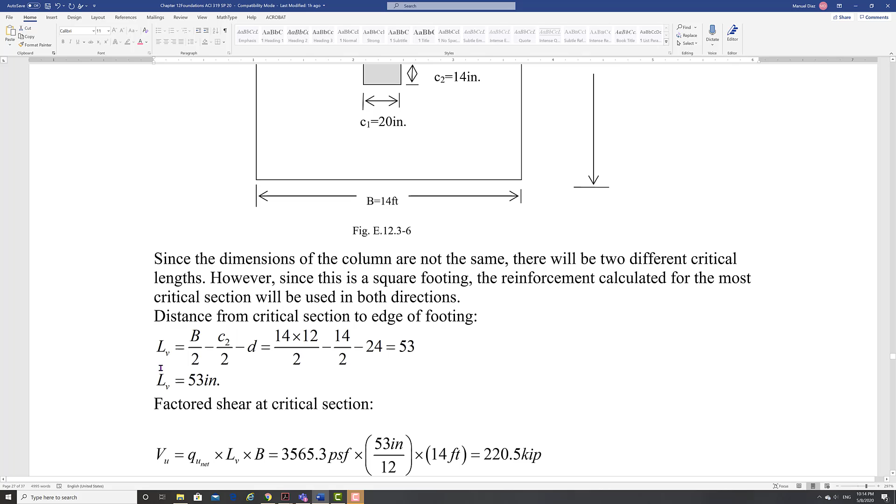So, yeah, for those guys that probably want to do that, yeah, you need a formula. Here's the formula, okay? But you don't really need a formula. All you're finding is the value of the critical distance D, and the shaded area becomes your area that you're looking for.

So that multiplied by the B, right? This distance multiplied by the B gives you the shaded area. Shaded area multiplied by your load gives you your force. That is your total shear that is being applied along this line. Right? So there it is. Pressure times area, force. Okay, that's my VU.

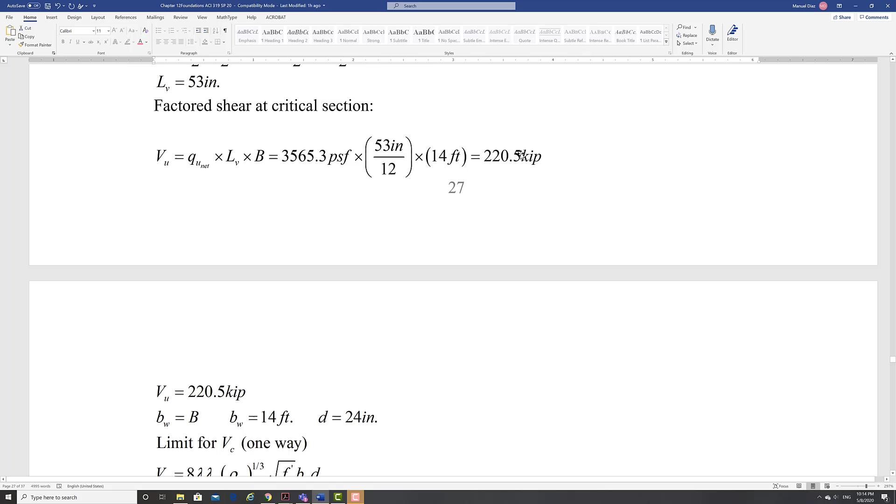All right. Yeah, let's double here. This is for MathCAD. See MathCAD, that one, you kind of copy the same thing. All right. So B there, your BW, 14 feet.

Because now, right, you're going to design, it's like you are designing now for a beam in cantilever, because this is your cantilever section, right? Cantilever is out that way. But it's like a beam that has a width equal to 14, right? And so that's why the BW is equal to 14 feet, because you are designing for this whole thing. Okay? So like this whole thing is in cantilever, and that's why your BW is 14 feet.

That's your B. Okay? So find the VC now, one way. Now here's the formula here. That's the killer formula. So assume number 8 bars at 12 inches. All right, so I get that one. As I said, go with the high value.

Otherwise, if you do low values, you are going to end up with a footing that is 4 feet thick. I mean, that's way too much. All right, so number 8 at 12. So that gives me 302 now.

0.75. Oh, this value is 227, which is greater than the 220. So we're good. 28 inches then is still okay for my height.

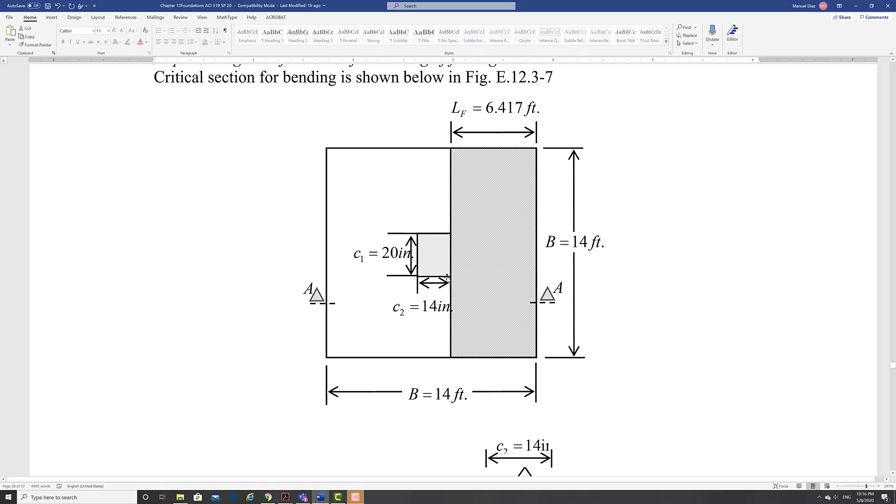Now I'm going to design for bending, and bending again from the face of the column. That's your bending. How do you find this value? Half of the footing minus half of the column in that direction gives you the value.

Find the moment. And the moment, remember, is WU L squared over 2. There's the L squared divided by 2, and this is your W. You're multiplying your Q net because it's a pressure, and multiplying by B to make it a uniform load, so this becomes now a W. So W times L squared divided by 2, that's your cantilever moment.

And from here, you know how to do this. Remember that your B is 14, that's all you need to remember. So we apply the same formulas.

Because I was using MathCAD, I was able to solve the quadratic equations, so I used this formula to solve for AS instead of doing the two-step approach. So when you have that tool, you can use this one. It's neat, you can do it.

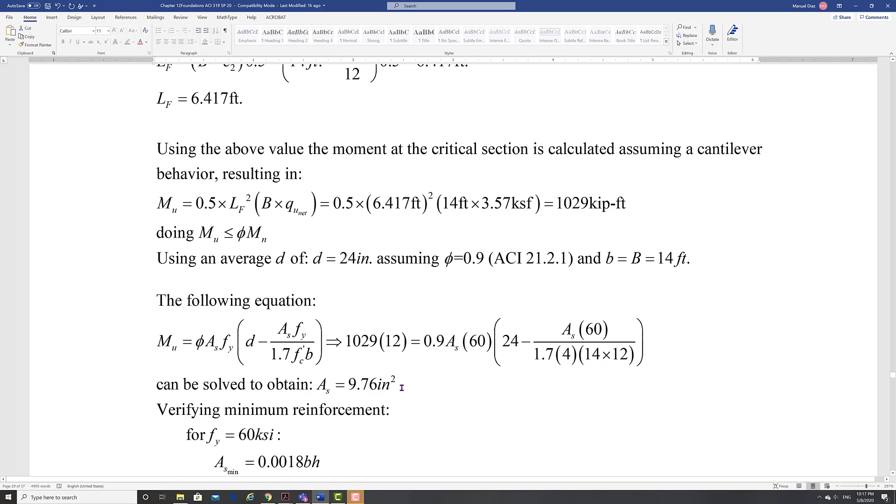All right, so that gives me my area. Check my minimum. Again, my B, remember this B here is your full B of the footing, because you're not designing per foot, you're designing for the whole width. So 847, this is my MathCAD.

I need to select the value. So you do the MathCAD here, it picks up the value, and it gives you the value that controls, which is the 976. So I went and looked, and I said 24 number 6s will give me 1056, which is more than that, and that satisfies this.

My maximum spacing, 84, 18. So now I look at my spacing, and I go B minus 2 times my cover minus 2 times half of the diameter of the bars.

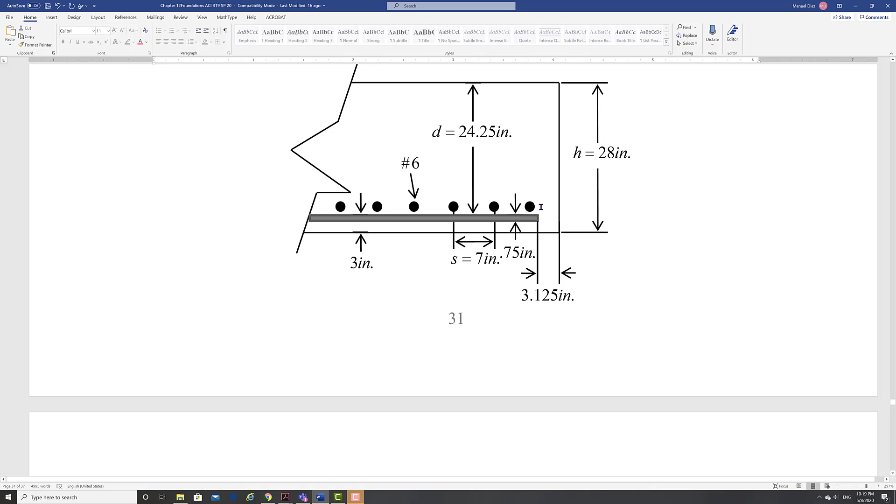Remember, there are no stirrups, so you go from the end here. So we are finding that you're going to subtract all the way to half of the bar, and then you're going to find your center to center and your spacing. But you need to subtract your cover and half of the bar to get there, so that's what we're doing.

We're doing it on both sides, left and right. So when we do that, left and right, then you get 2 covers and 2 half diameters divided by n minus 1, that gives me a spacing of 7. So you're putting your bars at about 7 inches. Your S maximum is 18, so you're good.

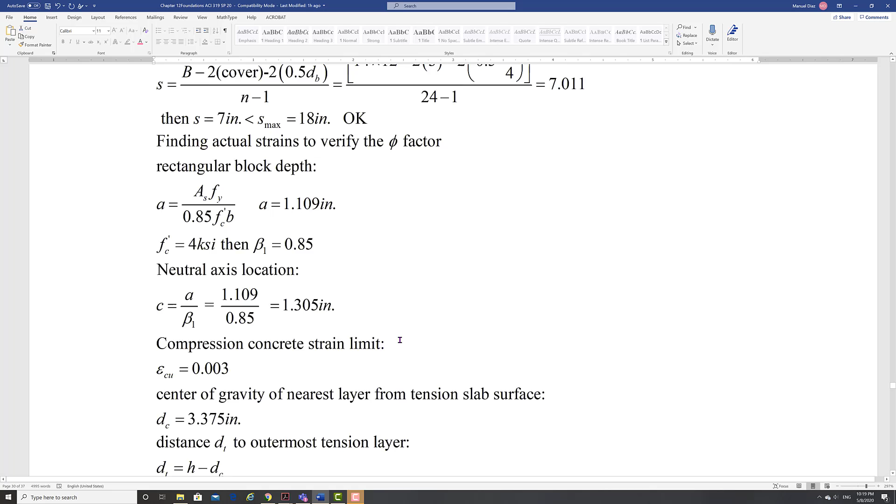So now I need to find my strength, my ductility. I'm going to check for my ductility. Beta 1 is 0.85. Let me check that, because I think I made a change to make it pass, because that shear was critical.

Yeah, see, I did 4,500. That's what I thought. So my beta 1 then is not 0.85, it's 0.825, because we are using 4.5. And so that changes here.

And so we got some changes. These are not going to affect the final design, but it's a change. So it's 1, 3, 4, 4. Compression strain limit, D sub C, that's the same, so that doesn't change. And so now here, this one changes.

Notice that this got lots of ductility. So ductility, usually you have lots of it. So it's like this slack, I mean you got lots of ductility.

24.625 minus 1.344 times 0.003 divided by 1.344 equals 0.052. All right, so not much of a difference, but ductility is great.

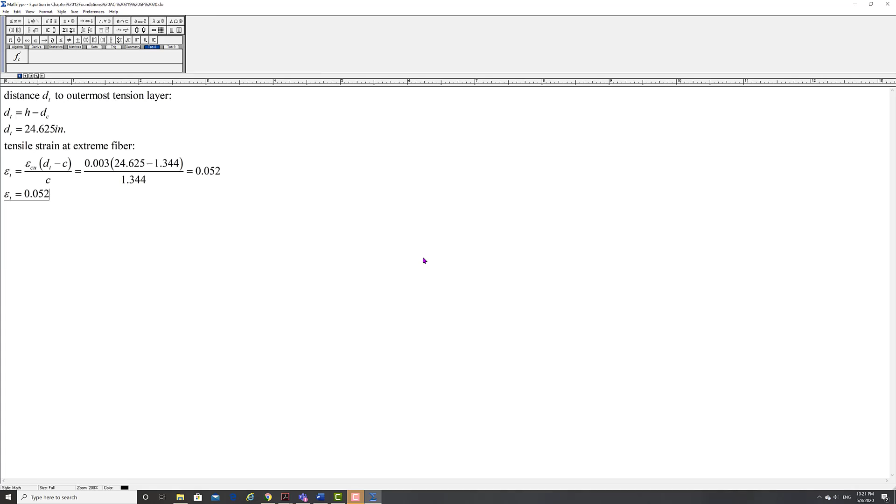This value is what do we say? A value. Oh, that one is the same. Okay, so that one doesn't change. So we're good, that one is good, so it doesn't change, we got that satisfied moment.

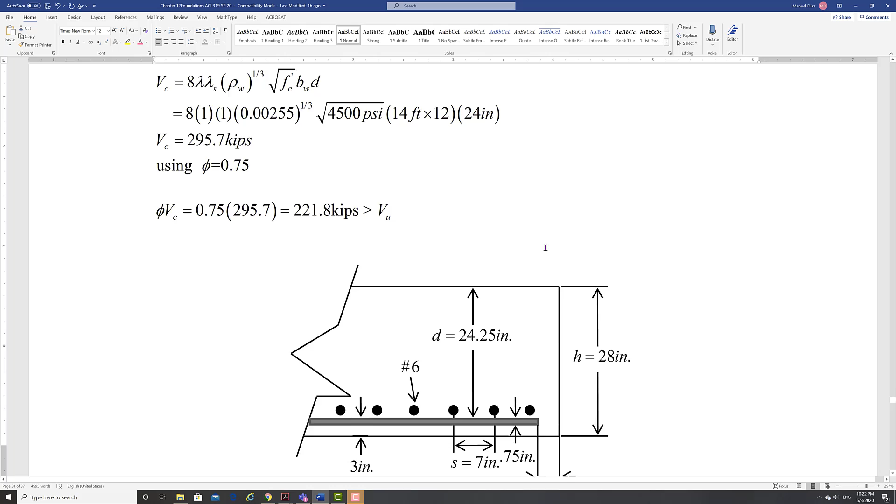And so with that, then I got my moments. So that's my design here. When I put in my bars, approximately at 7 inches, number 6 in both directions.

I didn't do the other direction because it has less length, so I'm okay on that direction, I already checked that. So that's the nice thing about having a square footing. Otherwise, you need to design the other direction, which is more work, double this number of pages.

All right, okay, now I need to recheck this one-way shear because that's critical. That's critical now, you had to recheck it. Don't forget to recheck it.

So I put 10.56, that's my total area, total my 24 bars. My B is the 14 feet, and my D is the new value that I found. So that gives me a rho w like this. I put it in my formula to find my value.

So we did that. So one-way shear is now super critical for footings, all right?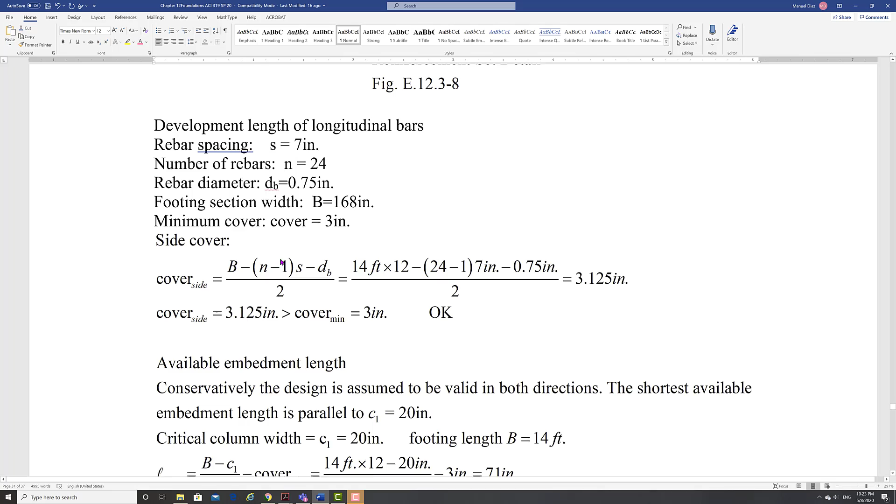Oh, you said we're done. No, I wish we're done. No, now we need to go into the other stuff. Now we need to make sure what?

Do you have enough length to put these bars? Development length, right? We need to have the splices. We need to have the bearings. So we still need to check those.

So development length, make sure that we have that. How much do we have available? Critical from the face of the column. So we find B minus the dimension of the column controlling, divided by 2. You look at the smallest one. In this case, you look at the smallest one because that's the smallest distance you have to put your bars, right? Minus the cover, that means you only have 71 inches.

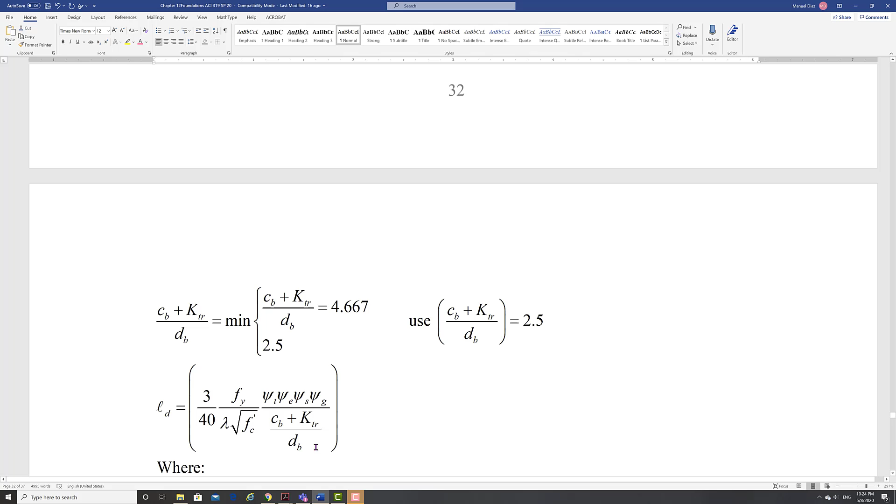Okay, so we're going to find our development length. Remember this little formula here, right? So we need to find all these guys, and that's what we're doing here.

Okay, so I find my C sub B. The spacing was like about 7, so it's 3.5, half of that. Cover, 3 inches minus D sub B over 2. Same thing on the other side. So these are then my two values in there.

And my transverse value, we can assume 0 because we don't have any stirrups, right? Check it here. Value controlling is 2.5, so we're going to use 2.5 here. The only thing we're having is we're using number 6 bars, so that one should be a 0.8. Other than that, all these are 1s, right?

And so we go and we put in the formula, and we get 17 inches, greater than 12. I mean, 17 inches is very small compared to the 71. So definitely we have enough length to put these bars.

Okay, bearing. Phi factor for bearing, 0.65. Area of the column is C1, C2, that's your area 1. So I found my bearing value, then 0.65, 0.85.

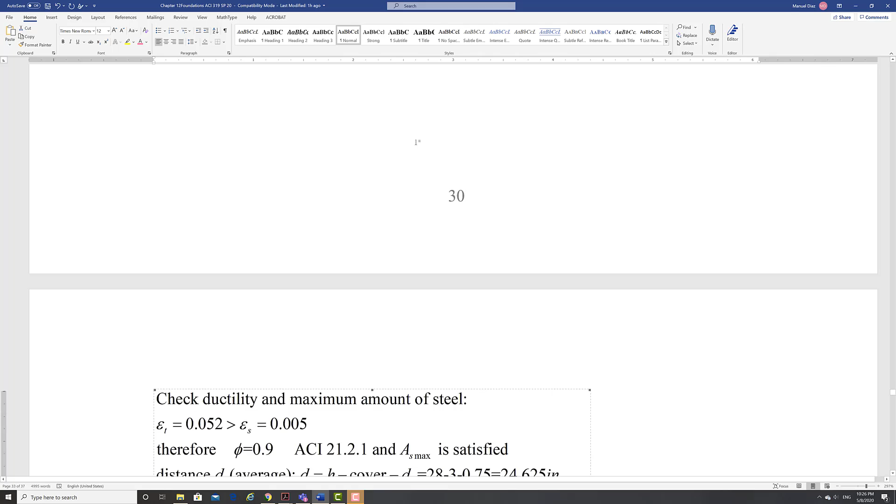So which one did I change? I think I changed the whole thing. Yeah, I had to change the whole thing. Usually it is more common to have a higher column strength than to have a higher footing strength, right? And so I think I'm using only one F prime C, and I don't know if I change it here on the top. Should I have changed it? I changed here, so both concrete column and footing, so both are equal.

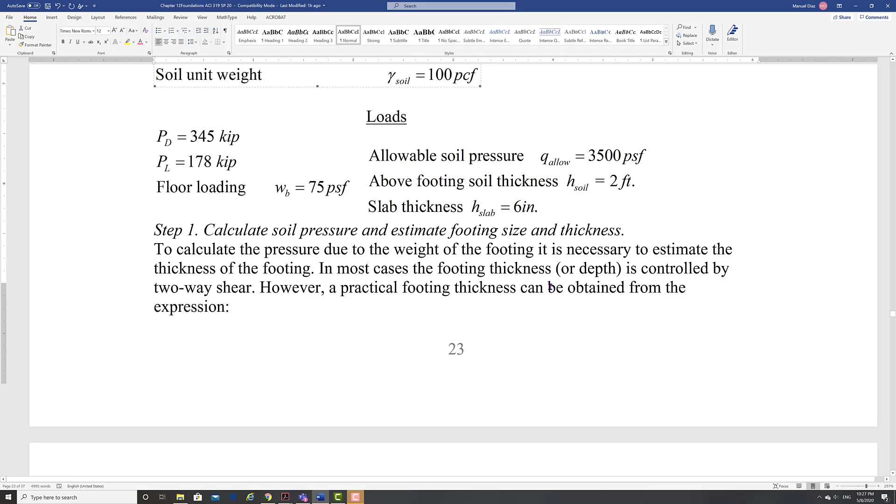And so that one, could I change it? Ah, great, so it's 4.5. Yeah, I had to make this change because the shear was not passing the 4 anymore, so I had to do that. That's what I say, one-way shear is critical now. All right, so with that, then that means that my column is the same, 4.5.

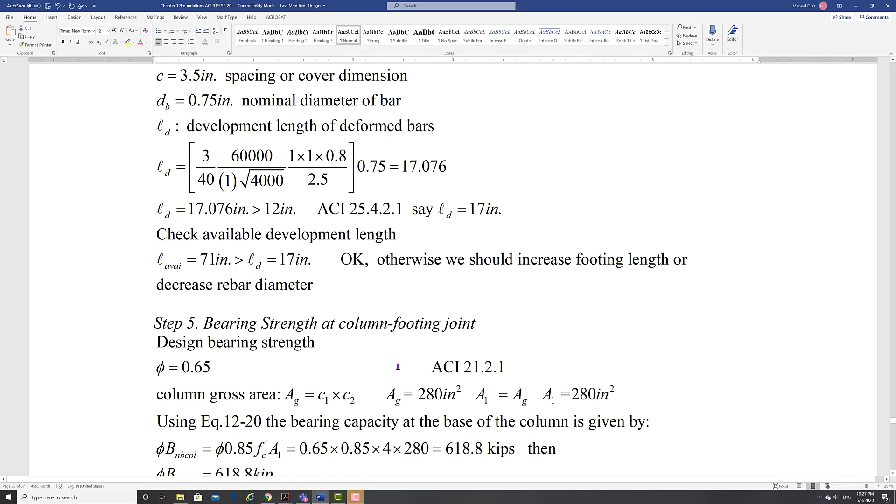And how about here? Did we do this one right? Yeah, I think we corrected that one. How about here? Yeah, all right. So now we have a 4.5 here.

So, 4.5, so then that value is approximately, what, 618.8 divided by 4 times 4.5. So you're looking at a 696.2.

This is because of MathCAD. 696.2, right? Actually, you don't even need it. I don't need it, MathCAD. So the B in the column is 696.2. All right, so we got it.

Now we need to do the one for the footing, right? So I need to find the area, right? B1. So we're going to find those.

So B1, B2 are my two values that are being checked here, right? So here is my B2, and here is my other one, the other one B1, right? So the one that is going to control is the smallest one, right? And so the smallest one is going to control, and that is your 11.

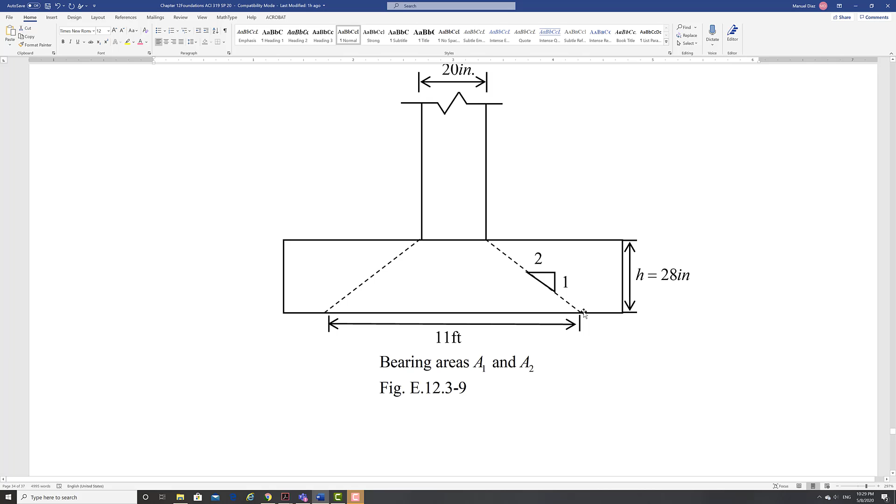So then the width of the footing is not your area anymore, it's this one right here. Since you're going to the bottom now, you have this value, and you get a different value on the side because of the different column dimensions. That's why we got two different values: this is the 11, and this is the other one. Because you're going 2 to 1, and you're hitting the bottom of the footing faster than hitting the walls of the footing. And so that's your area.

So area 2 then is B1 times B2. And that's this one, you multiply, divided by the area of the column. This is your area of your column. Now this value is always pretty big, so area 2 is going to control. Since this part is the same as your footing, when you multiply it's going to be the same as your column, you multiply by 2, it's double already. So the footings rarely control, as I said, unless the strength is a lot bigger.

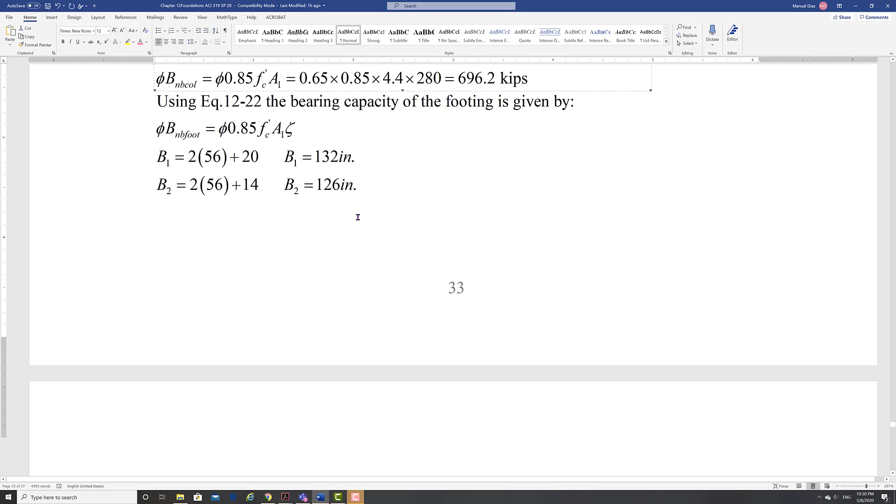So between the two values, you pick the smallest, and we change this one, right? That one is now 696.2. Oh, that means we should have changed the other one too. Yeah, we should have changed the other one too. So we need to change this one too, 4.5, and this one. What is it, 696.2? Okay, so we got that one. And so we need to change the other one too, because of that, so that's 1392.3.

Oh, this little change is going to make me work here. 1392.3. 1392.3 and 1392.3. All right, so that one is there. And of course, we're going to pick the smallest, and so the column controls. So your column value that we found controls, so that one controls.

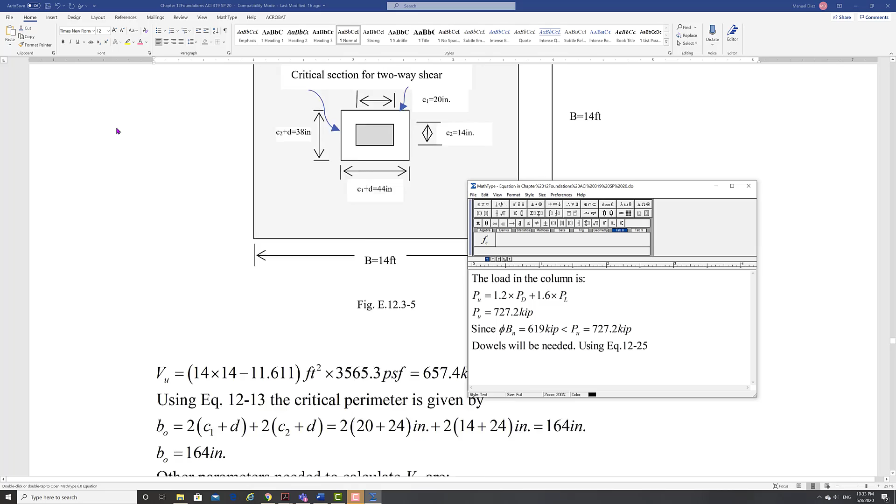And see what changes we got here. Find my factored load. I don't think I changed this one. So let's go here, controlling value 619. This one now has to change because I copied this from that MathCAD, but I changed the loads, right? And our loads were changed to what? 345 and 178. So 1.2 times 345 plus 1.6 times 178, right?

So 1.2... 698.8. 698.8. This one is 619, still below. There's a 698.8.

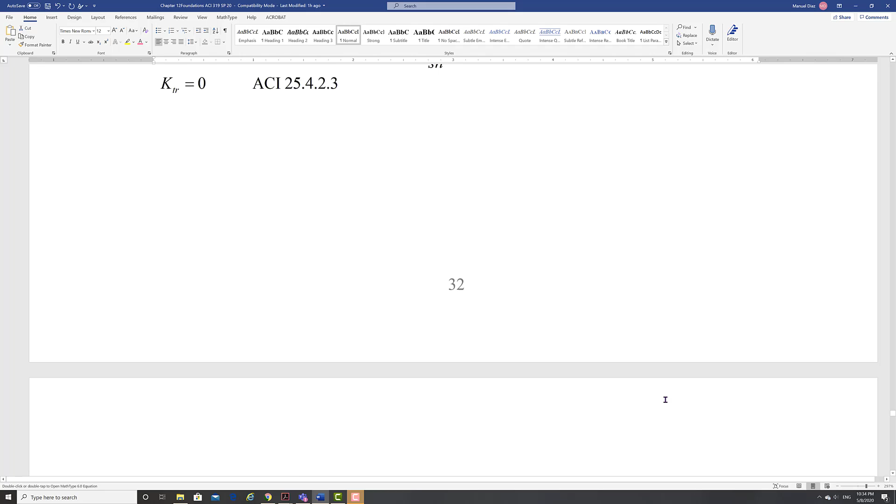And so dowels will be needed. So we still need the dowels, right? And even if you don't need it, you have to look for minimums, right? And so we are going to find that. Going back to this page. Oh, still development length. Oh yeah, we did development length already. So we did development length, and we're doing the bearing.

This one changes, now it's going to be a lot less. It's going to be less than the minimum, bro. Let's see how much we get. So this value is now 698.8. Okay, so minus 619. So that would be that divided by 0.65 and by 60, 205. So still, oh, but 205, yeah, I don't have value. Okay, right here there is a value, 205. Okay, so 205, this is the minimum. You have to check your minimum, and the 205 controls over the minimum.

So use a number 7 bar, that will give you 306. It's more than the 205. So we are good.

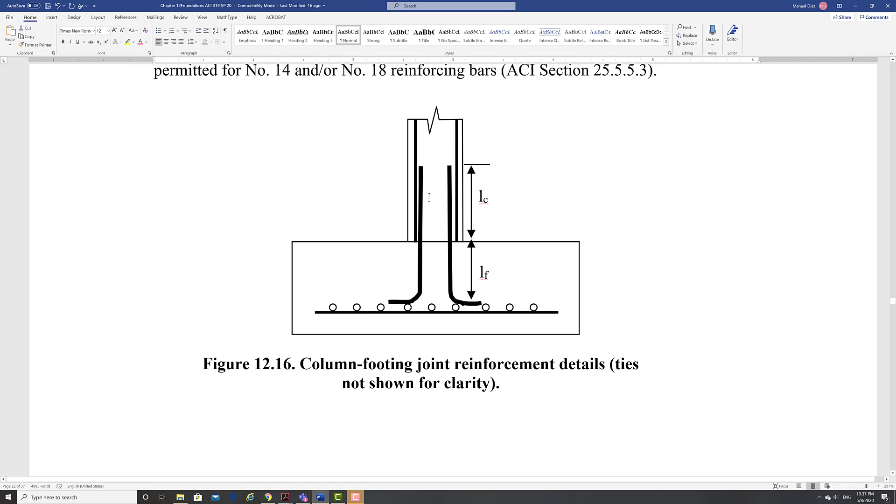All right, so we're going to do this, and then later, the next step will be to find this guy. But now I need to remember to change that F prime C, because I don't think I changed it. So, oh, I didn't change it here either. So there is another place where I haven't changed it.

So development length, this one, that was a tension one, for your main bars. We got 3 times 60,000 times 0.8 divided by 40 divided by 2.5 divided by the square root of 4,500, and that value is times 0.75. So now it's even smaller, so it's good. 16.6 - all those decimals came out from MathCAD, and they were doing all those decimals. Now you don't need all those decimals. It's greater, so we still can use the 17 inches, that will not change.

All right, so now I need to watch for that F prime C. Looking for this F prime C, we have this development length in compression formula. That's what we used, so this value will change again. That will be now 4,500, and so we get 60,000 divided by 50 divided by the square root of 4,500. And that number is 17.9. So this one got bigger, 17.9.

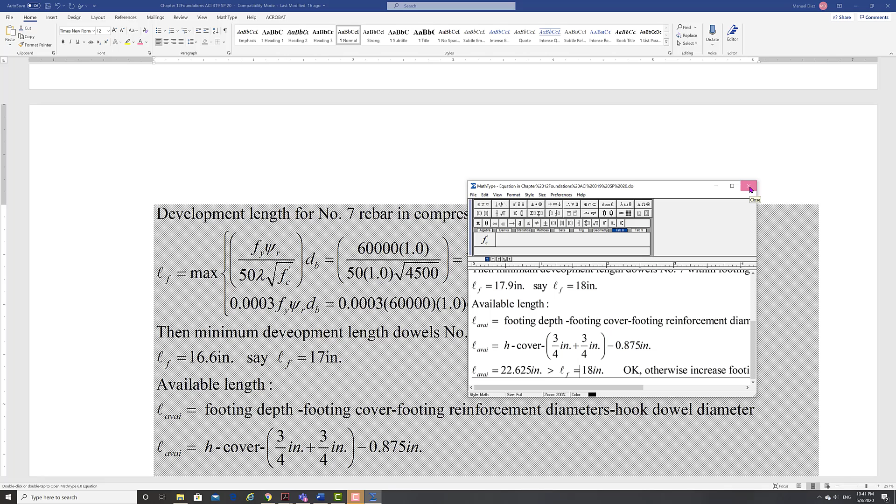So that satisfies that one. All right, so let's look at this available value, go back to that figure there. Do we have a sketch here? Yeah, so it will be H minus the cover, minus the horizontal bar, minus the other bar perpendicular to it, and minus the diameter of the hook, because we're stopping right there. Remember, the hook doesn't count, so that's your LF, right before that. So H minus 3 minus number 6, number 6, number 7.

All right, so we get that for that purpose, and that takes care of that anchorage part. Next, we need the splice on the top, right? We're having number 7 bars and number 8 bars. I did this on purpose because that way you can use that requirement in ACI 25.5.5.1.

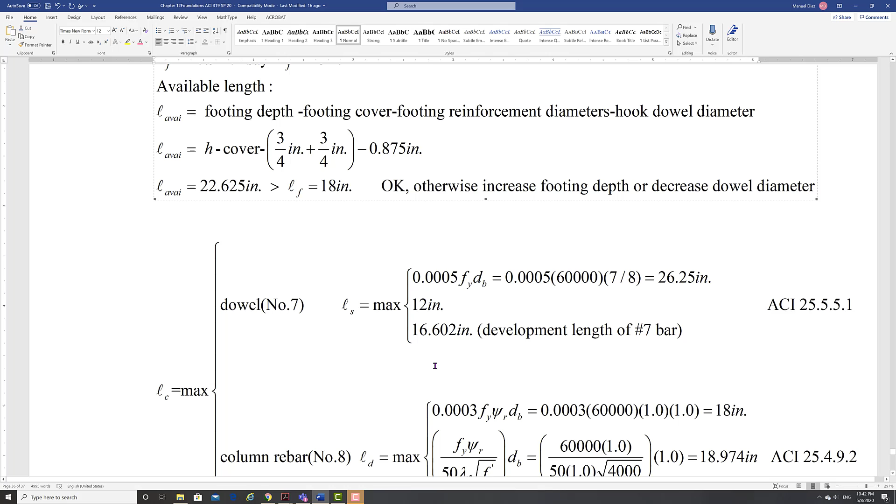You have different bars, then you need to make sure that you find the development length of the smaller bar, and you find your splice length, your development length for the larger bar, and your splice length for your smaller bar. So we had to do all these formulas. The number 7 gets all these formulas from the development length that we did, and this one is the development length of a compression bar, which is the number 8 bar, and we got all these formulas.

Now you check all these numbers, and whatever is the largest, that's the one that controls. So in this case, 26.25 controls. But remember, this is the development length of the larger bar and the splice length of the smaller bar, and you pick the largest of the numbers. So 26.25 controls, we say 28, so our splice length is 28 inches, and that's what we put here. That's our splice, and that's the end of this.

As I said, I eliminated the rectangular and all that, I don't want you to look into that, but that will be another topic there. So this is what you need to complete your footings in your project, and that probably will be the last thing you need to study for your exam.